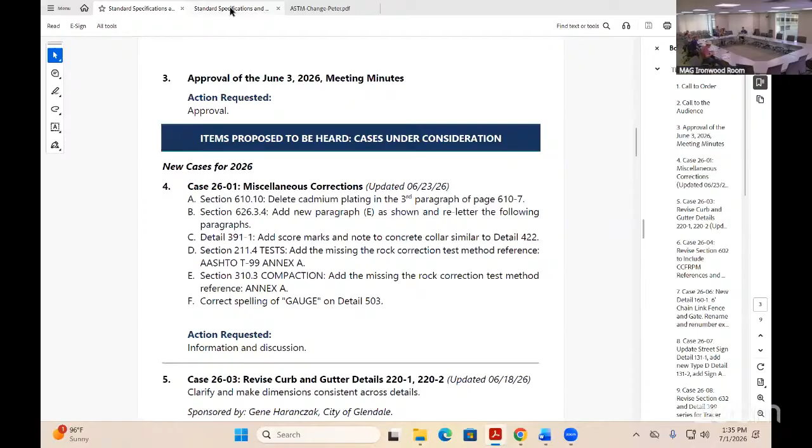Approval of the June 3rd meeting minutes. The meeting package was sent out last week. I'm hoping everybody had the opportunity to review the meeting minutes. As Gordon's walking through it, I'll open it up to see if anybody has any comment or correction that may not have made it into the meeting minutes.

If not, is there a motion to approve the meeting minutes? Mr. Chair, I motion to approve the meeting minutes as written. Thank you, Gene. This is Warren, I would second that. Thank you, Warren.

I guess with that, we'll go into the roll call. Thank you, Chair. We'll run down the list, starting with ADOT.

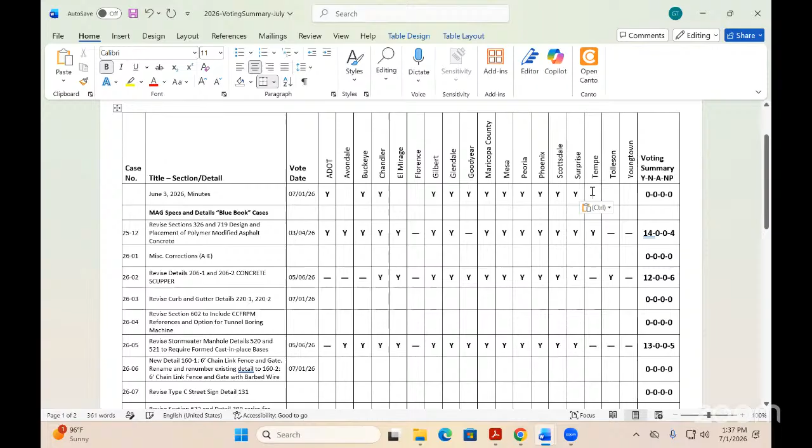Yes, this is Mike from ADOT. Avondale. Buckeye - good afternoon, this is Josh Ford, yes. Chandler, yes. El Mirage. Gilbert, yes. Glendale, yes. Goodyear, yes. Maricopa County, yes. Mesa, yes. Peoria, yes. Phoenix, yes. Scottsdale, yes. Surprise, yes. Tempe, yes. Tolleson. Youngtown.

Looks like the motion passes unanimously. Thanks everyone. We'll jump right into our case workload because it is quite extensive for this meeting.

Jumping right into case 2601, miscellaneous corrections. There have been three additions to the case. I'll go through the first one. Item D is a modification or correction to section 211.4.

It has to do with relations to testing and making sure that the rock correction test method is correctly referencing AASHTO T99 Annex A. That reference to Annex A was missing or is missing in the current specification.

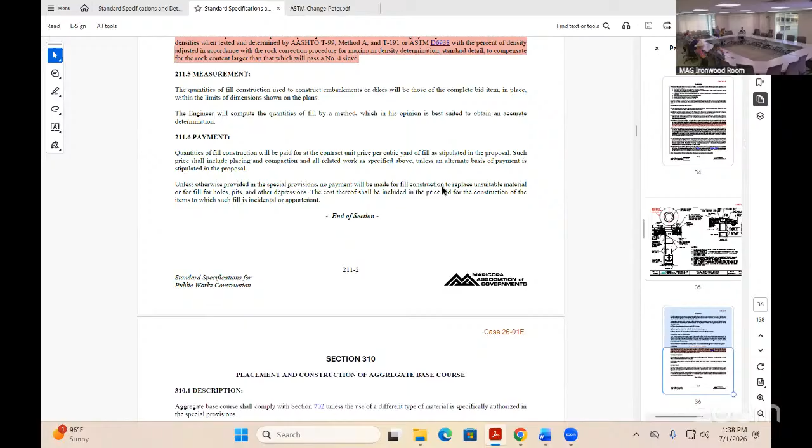Item E on this case is also the same thing, but that is under section 310.3. The rock correction also requires that reference to Annex A on the AASHTO T99 test method.

Finally, I believe Marty with Maricopa County pointed out a misspelling in standard detail 503, misspelling the gauge call out for the lid, as Gordon is showing. I don't know how long that's been around. Forever. And I'm pretty sure it's not the only one either.

Does anyone have any questions or comments on this miscellaneous corrections item?

Again, Gordon, if I'm not mistaken, the miscellaneous correction case stays open till we're done for the year? That's right, you can continue to add to it and it'll be voted on during the last meeting. So if there's another misspelling of gauge out there, feel free to point it out.

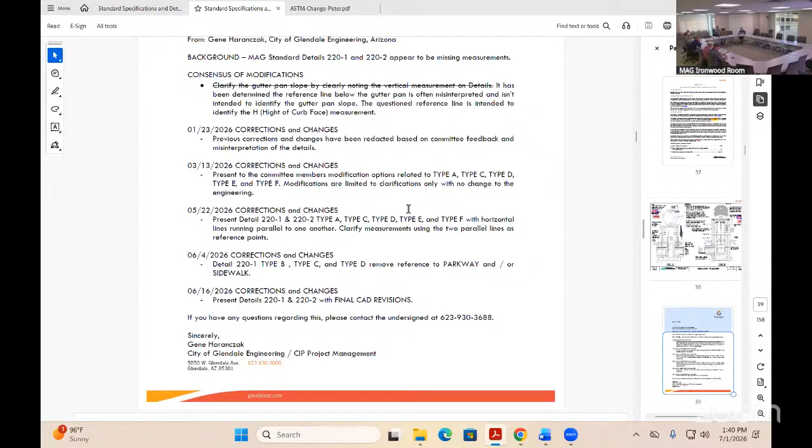All right, we'll move on to the next case, 2603, revisions to curb and gutter details 220. Gene? Thank you, Jose. There haven't been any changes to this since the last meeting, other than presenting this in CAD with a clean version.

One thing I did notice, and wanted to discuss - I haven't had a chance to connect with industry about it - after drafting the new CAD updates that we all kind of agreed upon, there's a cold joint reference for rolled curb and gutter type C and type D. I'm not sure if that was always there, but I'm not sure if it's going to cause a conflict with field construction when they place concrete monolithically with the sidewalk.

Like they do in a lot of housing developments, that might throw a wrench in the party for those guys out in the field, depending on the inspector they have. So I'd like to get some feedback from industry or from other committee members on whether we should keep that cold joint reference in there or not.

Do we have Brian Gallimore online? I believe so. Not sure if he can hear us.

Hey Brian, can you hear us at all? Oh, maybe you're not.

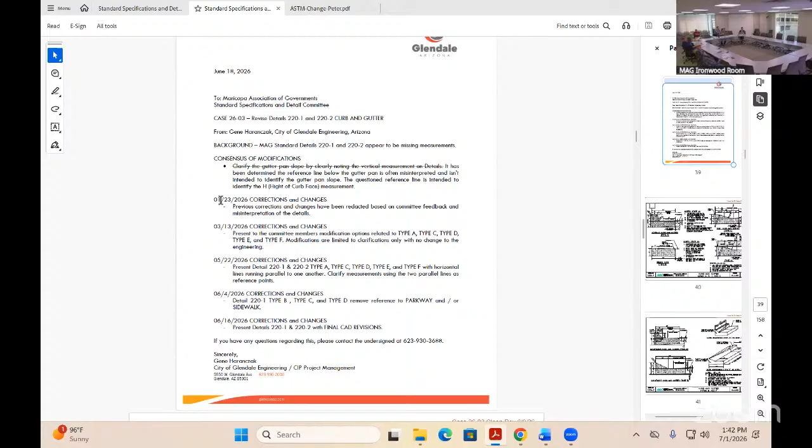So Gene, are you or the MAG committee changing any of the dimensions, or just changing the cold joint? There's a whole list, you can see all the changes on the cover sheet, but there are no dimensional or technical changes per se. Oh perfect, so the forms or nothing will change there.

Just to clarify, the way it was drawn before with the height specific to type A, the height for the face of curb was drawn on the far right of the schematic, and it was throwing a loop for designers thinking, what is that measurement? That horizontal plane reference line left a 1 inch gap that wasn't identified as 1 inch, so you lift the front of the curb up an inch, and naturally the gutter pan comes up an inch where it meets the asphalt vertically.

There was a lot of confusion with that. You can look through the changes made on each date, I have them on the cover sheet, but to answer your question directly, no technical measurements have changed. So we're not having to retool, same dimensions, same mold. After opening up type A, the whole committee realized we had the same problem across all the details, so we moved the back of curb measurement and cleaned up the visual aesthetics of it.

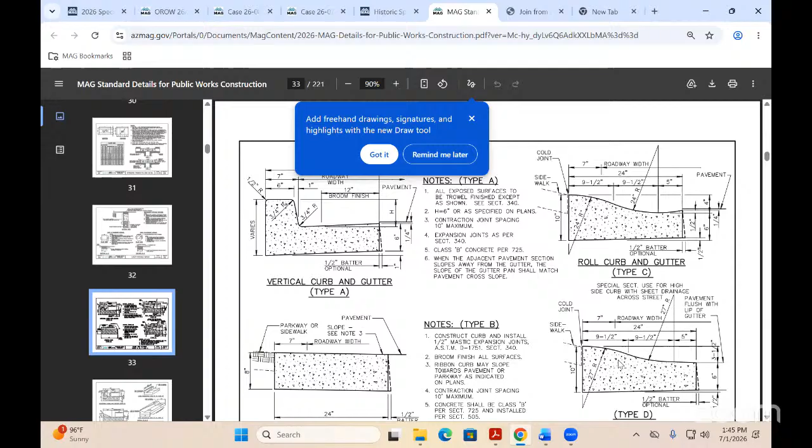That's not an ADA slope. Yeah, I don't think ADA applies there. Not only that, but we have a section for sidewalks, so a lot of times you have detached sidewalks. So really I think it's a moot point, I don't even think it needs to be in there in my opinion. If it was discussed, then yeah, I'm okay with it.

Does anybody else have any comments or questions on this case? I know we've been going back and forth quite a bit on this one. If no one has any other comments, I'll entertain a motion. Mr. Chair, being my case, I will motion to approve. Okay, thank you Eugene, is there a second? Mr. Chair, I'll second the motion. All right, thank you Ryan.

Okay, we'll go to a vote. Let's go ahead and run through again, starting with ADOT. Yes. So this is 2603, approval to revise the curb and gutter details 220-1 and 220-2 as presented.

Avondale, Yes. Buckeye, Yes. Chandler, Yes. El Mirage. Florence. Gilbert, Yes. Glendale, Yes. Goodyear, Yes. Maricopa County, Yes. Mesa, Yes. Peoria, Yes. Phoenix, Yes. Scottsdale, Yes. Surprise, Yes. Tempe, Yes. Youngtown.

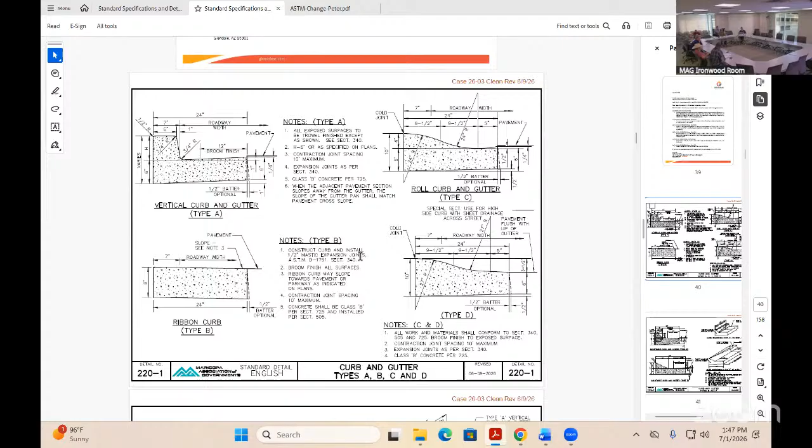Yeah. Arvid, I'll open it up to you if you can give us an update. Yes, sir. First of all, thank you, Gene. This is actually what someone who's been a part of this committee for a very long time in the industry really appreciates, is when the agency takes a lot of interest in it, because we want to get it to the place that, like Gene mentioned, it's not something you guys do day in, day out. And when you come across the need of it, you want to make sure you're fully comfortable with the way it's written and the way it reads. So Gene, great job. Really what has taken place is Gene has gone through it and just modernized it, specifically down in the area we were focusing on, which is down in the carrier pipe installation procedure.

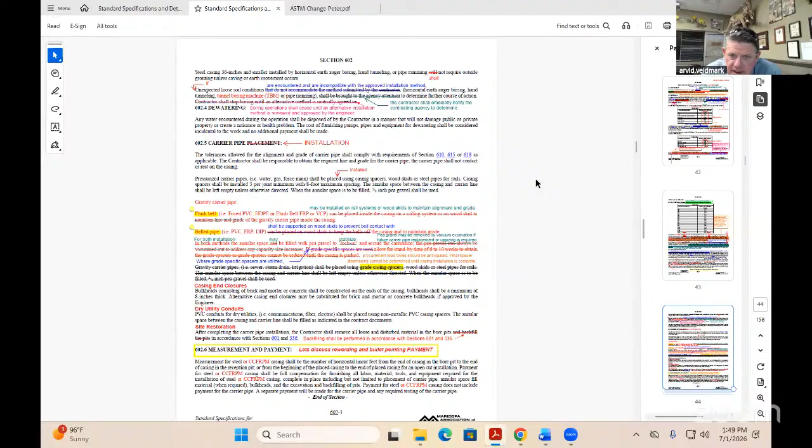He got really dialed in on the flush bell. What this was driven by at the beginning was needing to get agency and the industry on the same page with understanding that casing spacers are not a preferred installation method for gravity feed applications of sewer, particularly because of the reality that you can't order those spacers until the casing is parked. And with lead times ranging out as far as 12 weeks, you don't want to be having a bore pit open, unutilized for 3 months, waiting for spacers to show up.

And as we are moving more into sustainable sewer line products, such as are listed there, the PVCs, the HDPEs, and the FRPs, they all come in flush bell configurations, which allow for the carrier pipe to be installed through a casing on either a rail system or wood skids, and then fill the casing with pea gravel. If a belled product is used, you typically would then default to the wood skids method, or if you're so choosing to wait for the spacers, that's a choice that's also there. And Gene did a good job of explaining and just at least stating the reality that there is a time constraint there.

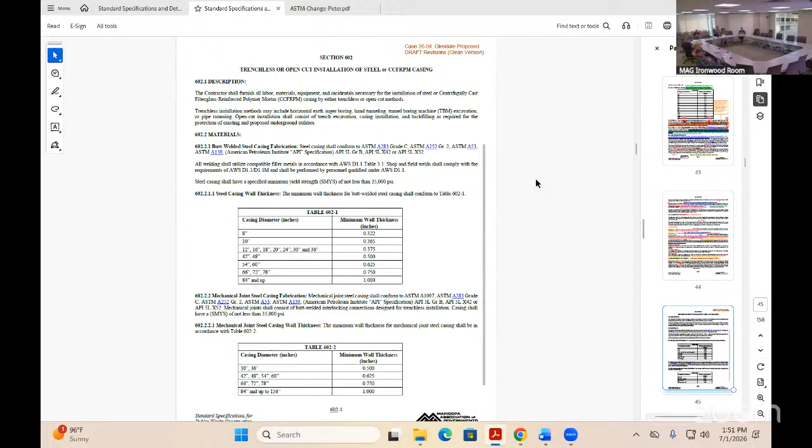It might be good to go to the clean version and let it be read and seen on the screen there, Gordon. And then Gene, do you want to take the helm and add anything in addition to what I've said? Yeah, thank you, Arvid. I had basically wanted to get with the committee, Mr. Chair, on the 602.6 measurement and payment.

I moved in on the clean version. I kind of moved in with bullet points, and I just want to be able to follow the publication's layout. So really that's what I'm going to ask the committee to look at the whole case, but also pay attention to the way it's structured and laid out, and make sure that it's consistent across the board with the rest of the publication. I had a hard time reading that 602.6 because it was so jumbled up that by the time I got done with one sentence, focusing on the next sentence, I forgot what I was supposed to check on the first one. So I just put it in bullet points, that way you can go through the list of payment items.

You're talking about 602.6, Gene, right? 0.6, I'm sorry. Yeah, 602. Okay. And just to clarify your intent, Gene, you didn't make any intentional changes, you just reworded it. I did. I just reworded it, and I had Arvid proof it twice. I think the second proof, Arvid, did you get through the whole clean document?

I did, and I have 3 things that I think we can either talk about this month while the committee reviews it, because it's obviously going to need to take a little bit of time to be looked at, or we can, I don't know if we want to take time to do it now. I think it might be better for you and I to talk first, and then we can present it to the working group or just to the committee next week or next month. Yeah, in the sake of time, I think that's probably the best. Okay. Something like quick reference, but if it's in-depth discussion, it's probably best handled at the working group.

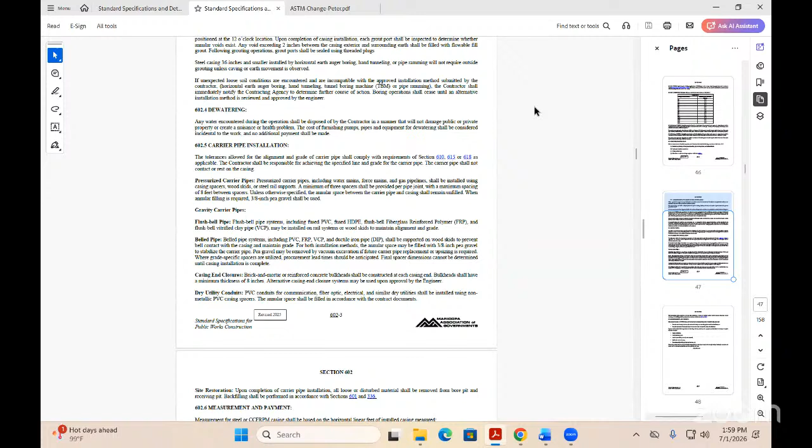Sure, yeah, I think Gene, you and I need to talk about that a little bit then, and maybe even include Mike on that, because again that is really a big aspect that as we expand this, we need to have more discussion on it. Okay, yep, I made a note of it. All right, thank you Arvid. Thank you, Mike.

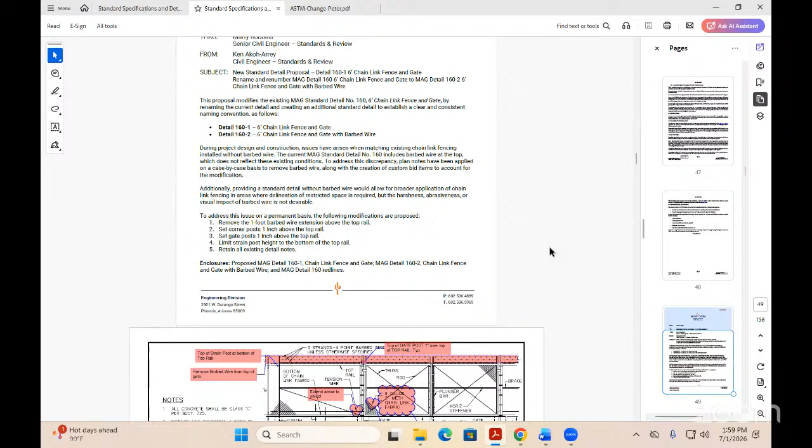Marty, can you give us an update on this case? This is Marty from MCDOT, Maricopa County. I don't have an update for this case. I know people are going to have an opportunity to take a look at it, see if they have any questions, so if there's any questions, if I can answer or not.

Okay, thanks Marty. I see that the last update for this case was back in May. I think we've all had a good opportunity - this is a minor change, I think it's been discussed. Does anybody have any comment or remaining question on it?

Mr. Chair, we did discuss it quite a bit at the last meeting. In my opinion, it's ready to go.

So with that, is there a motion to approve? Yeah, Mr. Chairman, this is Marty Robbins from MCDOT, I'd like to make a motion to approve this case as shown. Thank you, Marty. Is there a second? Mr. Chair, I'll second that motion. All right, thank you, Gene.

Okay, we'll go ahead and take a vote. This is case 26-06, which is creating a detail for the chain link fence without the barbed wire and renumbering the existing one.

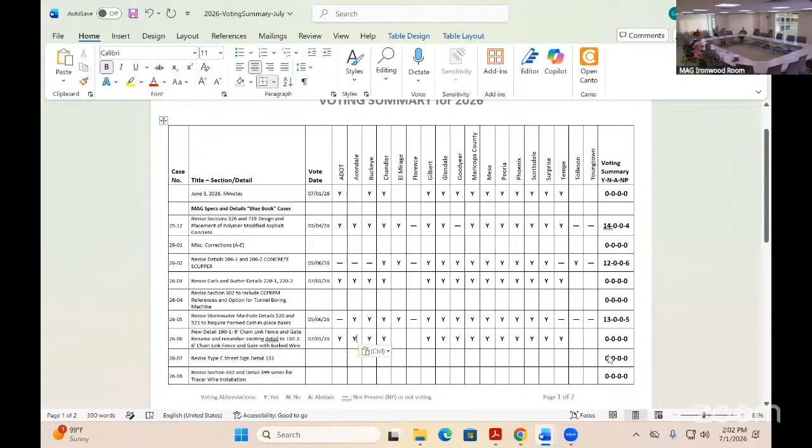All right, thank you, chugging right along. Our next case is 26-07, updating street signing detail 131, 131-2, and 131-3.

Warren, can you give us a brief update on this? Thank you, Mr. Chair. I have not made any updates since the May packet. I know we did talk about it in the working group, and I've received some feedback from Gene on the U channel and from Jose on the round post that we can talk about.

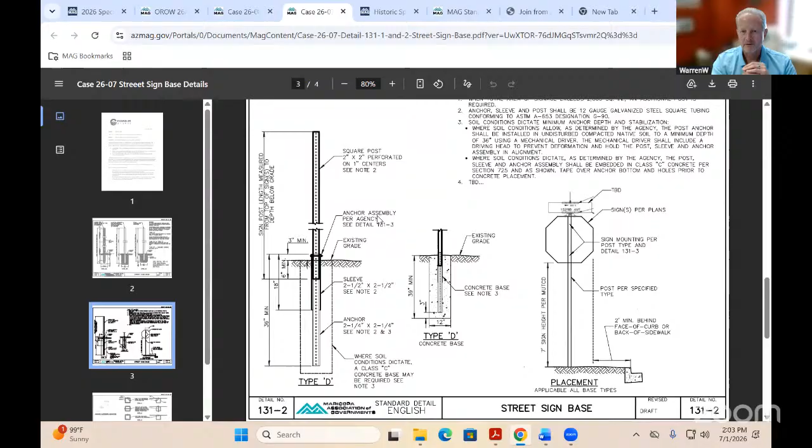But it seemed that I wanted to talk a little more with this committee. One pathway would be that we just decided to only have the square post - obviously the predominant standard in all of our agency details - and then potentially remove the U channel and the round post and possibly put that outside the right of way. I'm okay with either way.

I've spoken with our sign shop, but their feedback has always been they predominantly use the square, but there are instances where they still use the others, and we still have those other types of posts out there. When they do replacements or a new CIP project, they do swap them out in favor of the square post, but so yeah, before I did anything on that, I thought I'd just regroup with you all and get some feedback on where I should go with this.

As it stands now, we can leave everything in as is, if others are using these other types of posts. I've even seen the U channel used with some almost breakaway looking base. I was up on one of the mountain roads outside of Payson and noticed that, but I haven't explored it beyond that. It just seems, based on what everyone's using, that the MUTCD is geared towards that square post as the breakaway standard.

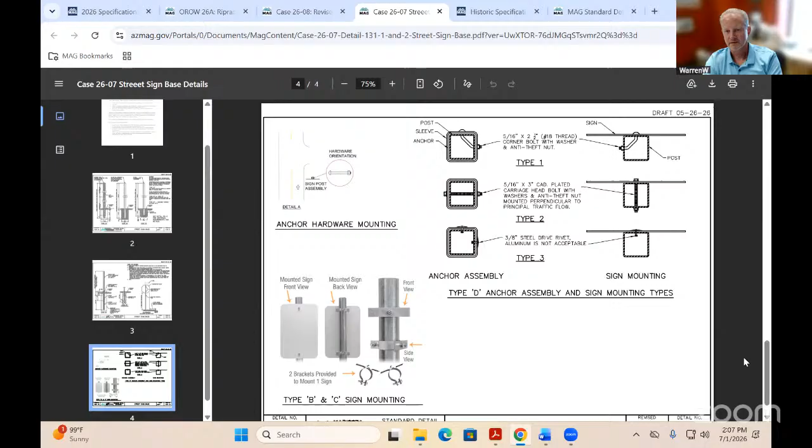I guess that's part of the challenge when we're trying to make an all-inclusive detail. No, and that's the ultimate goal, to allow the ability to reduce supplements. Then that would make sense as this first step to get everything on here, and we can always take it off later if that becomes the one standard. I would be in support of that.

Does anybody else have any conversations with their signing staff or any thoughts on top of their head? I do like your note, Mr. Chair, about agency's approval. Yeah, that's a good catch-all for when we have multiple options.

Mr. Chairman, do you want to possibly say agency approval when used in right of way? It seems like that's the problem - that it contradicts other standards if used in right of way. Or am I not hearing this right?

No, I think it's just the concern that Gene is kind of leading up to is MUTCD may have certain requirements as far as base height, making sure a vehicle can go over it, have a breakaway requirement. And we want to be careful, Mr. Chair, of overstepping those boundaries with the MUTCD.

Correct, but that's primarily in right of way - this standard is for right of way. I guess the way I'm interpreting it, this is a right of way detail, right? Whether it ends up applying to private property - well, I'm thinking parks, agency owned facilities that are not in the right of way. Does it? I think most of these would apply for that situation. Yes, I've never seen breakaway in parking lots.

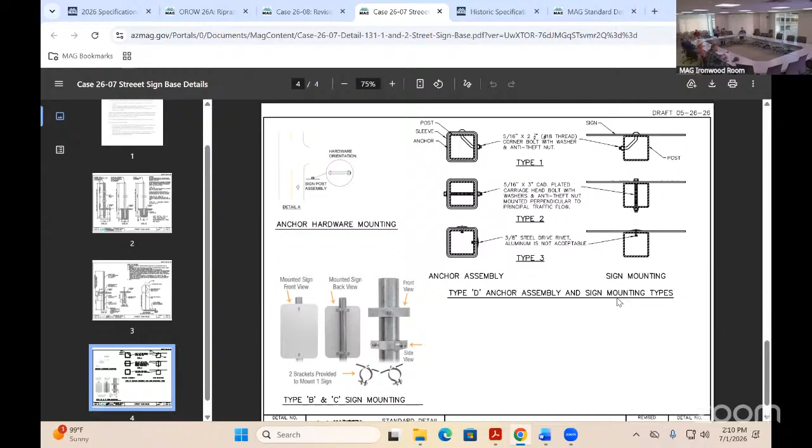Jim, I saw you turn your camera on, were you going to comment? Mr. Chairman, could you go back to the detail D, or the type D? In Avondale we use that, and I liked what we're doing there because preferably we don't like to use concrete since it hinders replacement—you end up digging out the big base, and contractors put it in when they shouldn't. We talked about that, where soil conditions dictate Class C may be required, see note 3. I like what we're doing there, but again, the agency should make that determination. Some soils don't need the concrete, but if you're in sandy soil, you're probably going to need a concrete base for that type D.

Right, Jim. But in most cases we have really good luck with no concrete—it's easy for our crews to replace, because if there's old concrete base in there, you have to dig it out. It really hinders and takes forever to replace the sign; this way you just punch it and go. So I like that we have that option in there. That's what I've heard as well—the preference is obviously just to punch it and go, but there may be those few instances where it doesn't work and concrete is the option. So, all right, thank you.

Is there anybody else that has a comment or question for Warren on this case? As the case goes, in the next couple weeks, Warren, we can touch base on some of the comments and see what I hear back from our planning staff as well. I encourage everyone to please talk to their sign shops and see if there's any strong feeling one way or the other, whether we should potentially move them outside of the right of way or keep them at this as a first step. Please share that feedback. All right, thank you.

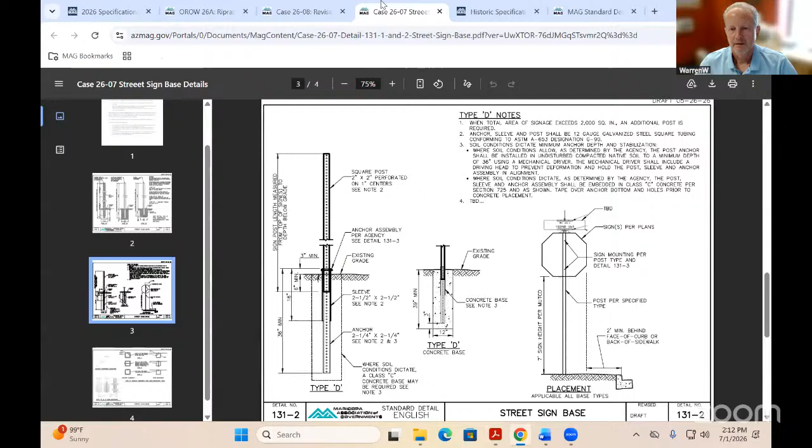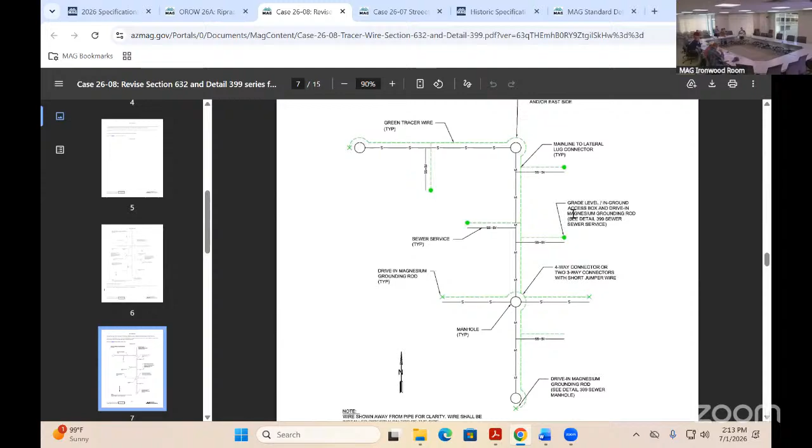Unfortunately, not a lot to report. We still have not had a chance to get the details drafted up, so the last update is on the spec. We very briefly looked at it in water and sewer, but it felt better to wait until we had a little more to talk about since there are other more pertinent items on water and sewer to look at. So don't have any feedback or comments to share today, but really would like to get those details for the August meeting—that's where we're at. Thanks for the update, Warren, we look forward to the updated details. If any agency has also implemented this or started to implement this—I think Warren asked last time—any lessons learned would be perfect timing to share right now. Thank you.

Case 2609, revised section 631, water tap and meter connections for PEX A pipe. Looks like last month there was an update, Warren.

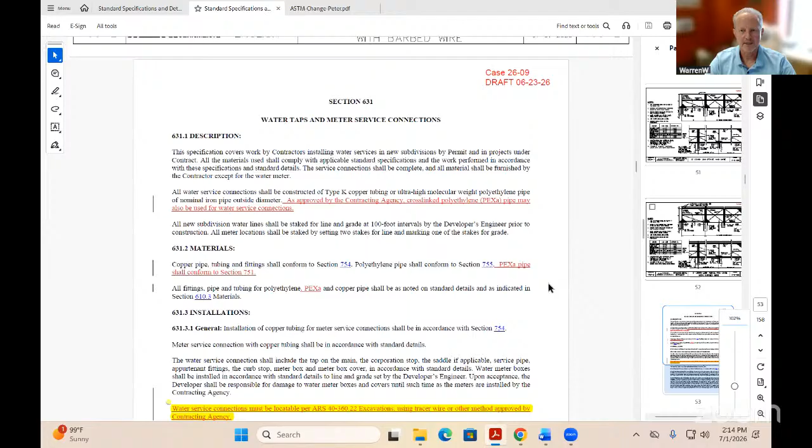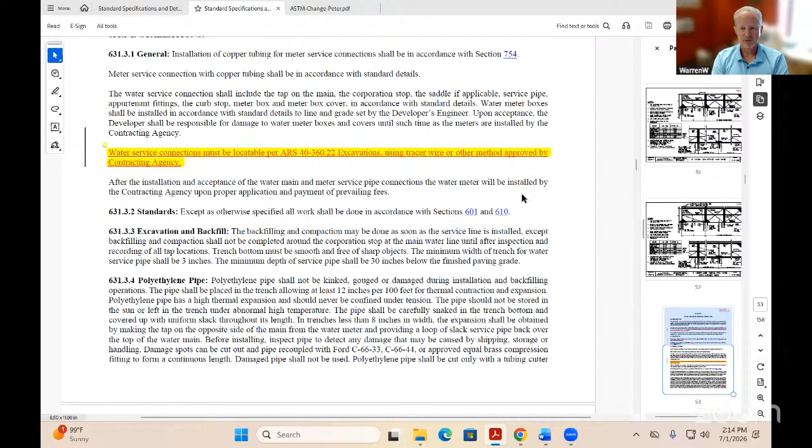Correct, I did do an update based on some discussion at water and sewer and a typo that I had. So what's shown here highlighted is new from the previous draft version, adding in the requirement to draw attention for service line connections that—if you scroll down a little bit, Gordon—the water service connections must be locatable. They're not saying it has to be tracer wire, but it has to be approved by the contracting agency. We haven't had a chance to talk about that at water and sewer since it's new, but that's the latest draft. Down below I'm just fixing some typos in the section numbers. I haven't received any comments yet on this, but this is where it's at.

Anyone have a comment or question on this particular case? Did you want to take a look at the wording I added for the tracer wire—I'm sorry, for the locatable language? Scroll up a little bit, sorry. Maybe just read that language real quick and see what everyone thinks about it. Yeah, right there, yeah.

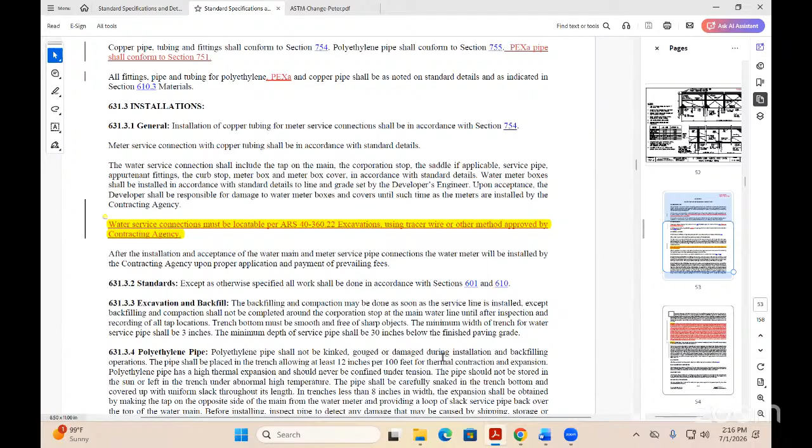How does that sound? Yeah, it looks okay to me. I don't have any comments on the language. Anybody else have a comment?

No? I noticed I use the word 'must' sometimes where in a lot of cases we're saying 'shall' in the MAG. Do you think we should be consistent between the must and the shalls, or is that okay?

How much time do you have? We must, may, versus... Our attorney, I don't know if I've shared with everyone, but we went through all of our manuals and changed every 'shall' to 'must'. So therefore I've been reprogrammed. Must is acceptable. Hopefully you don't change attorneys in the near future and change something else.

Yeah, no, I think it's in line with the rest of the manual, right? I don't know that the manual itself is consistent on the use of must or shall, although I think I tend to see more shall than anything else, but yeah.

All right, Mr. Chair, I don't have any objections as written. One way or the other, I'm good either way. It's just a reminder it is state law, right? So yeah, it's all right. Thank you, Warren.

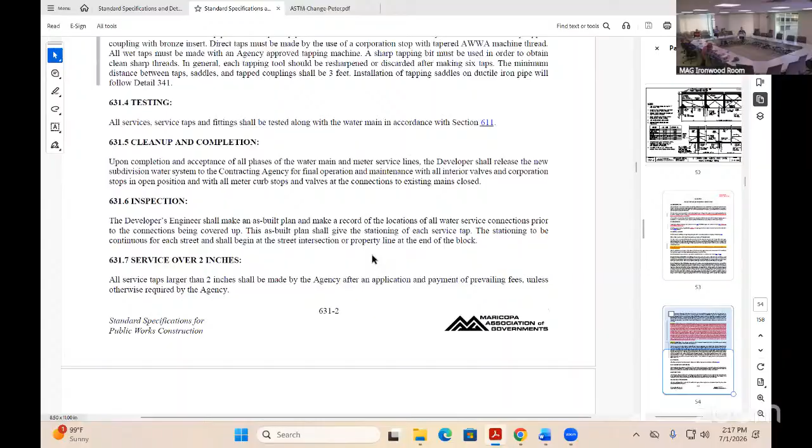All right, case 26-10, revised section 757, for references to filter fabric. Peter, can you give us an update? Yes, thank you, Mr. Chairman. Instead of putting this as a miscellaneous case as was discussed in the last meeting, this was put in as a case because it was a change from the type of material that was being specified.

The reason it had to be revised was initially because the ASTM requirements shown in the standard weren't correct. We initially were going to just call out similar ones, but after discussion with the landscape architect folks, they felt that table 796-2 was the more appropriate one for just a separation fabric. So trying to get rid of a lot of stuff that was maybe or maybe not applicable, we simplified it down to saying valve box material shall be a filtration fabric and referencing now 796 in the table. So it's really a simplification.

And just remind me, Peter, 796 is just your regular... separation? 796 is our geotextile specification, not erosion. We have somebody who is reviewing the entire spec, and next year we'll be proposing changes to that. Okay, but in the meantime, that section still is applicable.

And after review by two landscape architects involved with it, they thought that material was fine. No, and I like and appreciate the fact that you're writing it in a way that if we have to update 796, then this is taken care of. So yeah, that's the idea, is always try to make it so you only make one change once, and not have duplications.

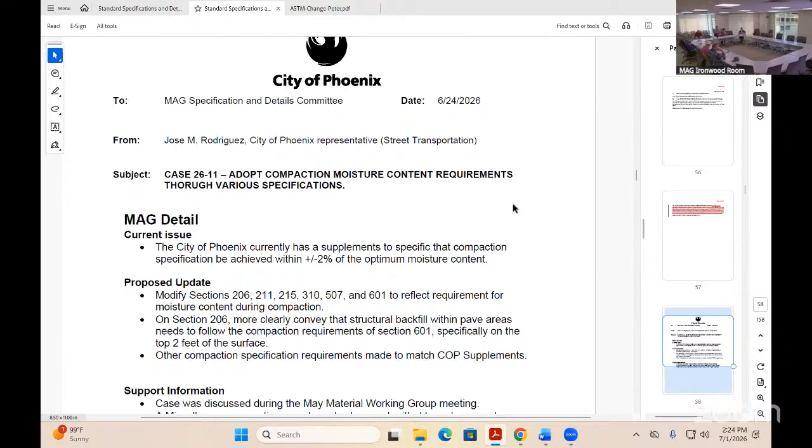I'm presenting this case. The background is that currently in the city of Phoenix, we have a supplement where all the compaction specifications have to be achieved within plus or minus 2% of optimum moisture content. This is something the city of Phoenix has adopted over multiple years. I really don't know exactly how far this goes, but it goes quite a bit from what people have told me.

In an effort to simplify our supplements, we wanted to bring this up to the main MAG to see if we can also incorporate this requirement into it.

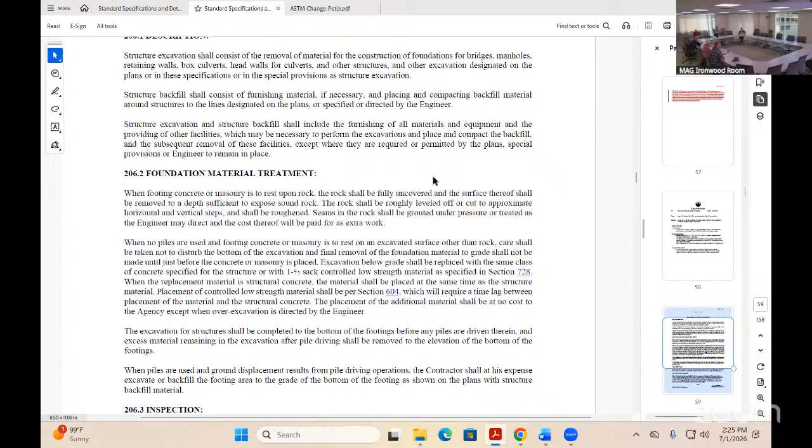What I did is I went through the different specifications where it calls out a minimum compaction effort and added the language that compaction be achieved within plus or minus 2% of the optimum moisture content. There were a couple specifications that already had a reference to the requirement of moisture - we just made everything consistent to be 2%.

I think there was one other case that was recently adopted that allowed plus or minus 3%, but this way it's consistent across the board.

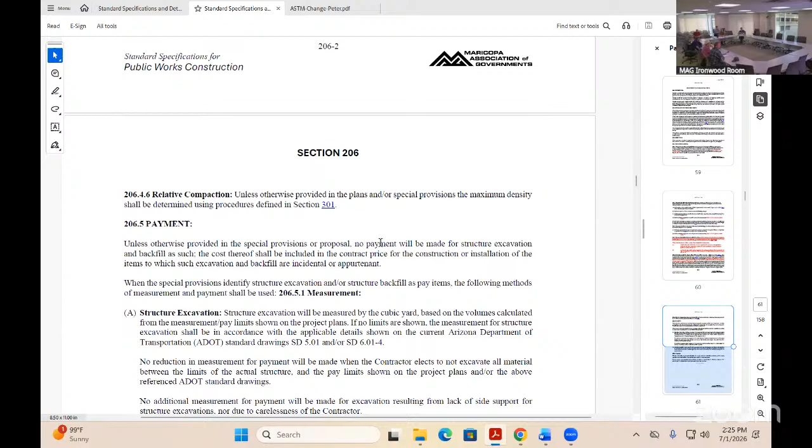Mr. Chair, this is plus or minus 2% of a laboratory compacted specimen, right? Correct, this is plus or minus 2% of the Proctor optimum moisture content.

Which is that a 698 Proctor, I would assume? Yeah, whatever is the test method specified on the compaction effort, but I believe yes.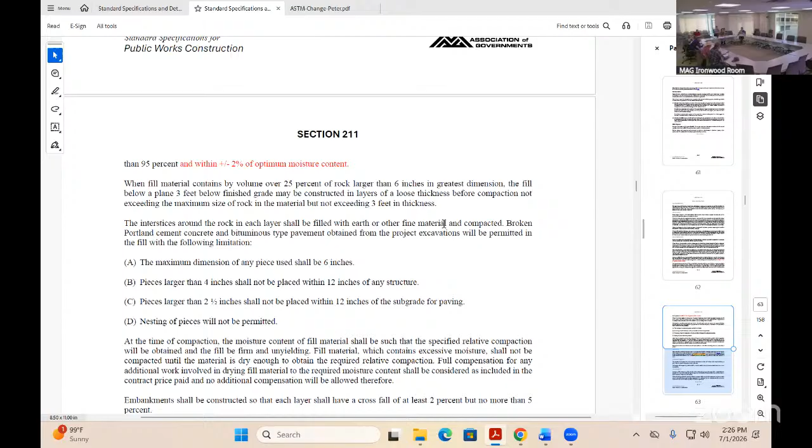The only reason why I ask is because Glendale for the longest time, since the beginning of time, was plus 2 minus 4, but it was a 1557, which is twice as heavy of a hammer and 5 lifts versus 3. So there's a lot more effort going into it, but with the 698, I think plus or minus 2% would be appropriate.

Yes, I'd be lying to you if I recall every single test method called out. I think consistently, pretty much most of the specifications call that.

ASTM D698 - oh there it is, right there under 211.4 tests. Oh wait, no, that's ASTM 6938. So that's the field testing, not the laboratory compacted specimen.

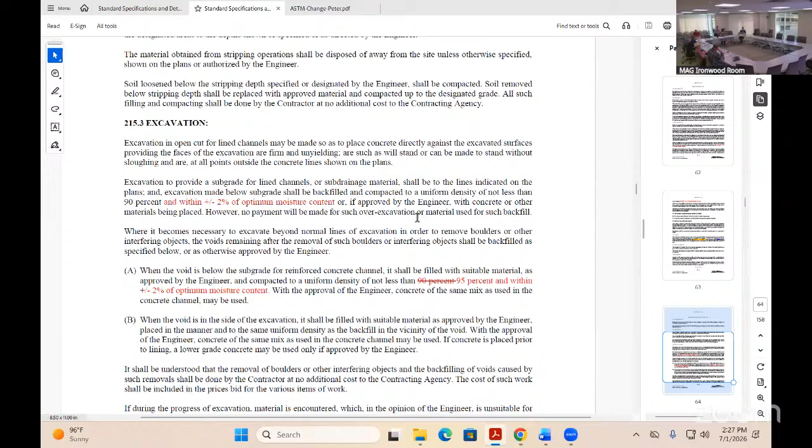Yeah, this is field compaction requirement. When you take a test in the field, you're comparing it to a laboratory compacted specimen. Are you saying the percent compaction needs to be plus or minus 2% of the laboratory? No, the compaction requirement stays the same. So if it requires 95% of the Proctor...

The only thing this is adding is that the compaction effort we achieve while the material is within optimum moisture content, plus or minus 2% of the moisture content for the Proctor, for the laboratory compacted specimen. Which we haven't determined - we assume it's a 698, right?

Some of these don't define which test method. Well, that's what I'm having trouble finding. So when you're asking, I'm trying to find out exactly - I'm in support of plus or minus 2%, unless it's a heavier Proctor, like a 1557, where you have a lot more effort going into it. Well, even then, it may still be - it's not changing the value of the Proctor you're getting, right?

It's just making sure that, because technically you can achieve compaction with little moisture content, you just need more compactive effort. You're still going to hit your 90, 95, whatever it is. This is just saying that compaction effort needs to be achieved while the material is close to optimum moisture, within plus or minus 2% of optimum.

It's interesting these sections don't define which method until - well, there's a section that says test method. Is that just to help contractors achieve compaction, or is there some performance related concern with being over or under and getting compaction?

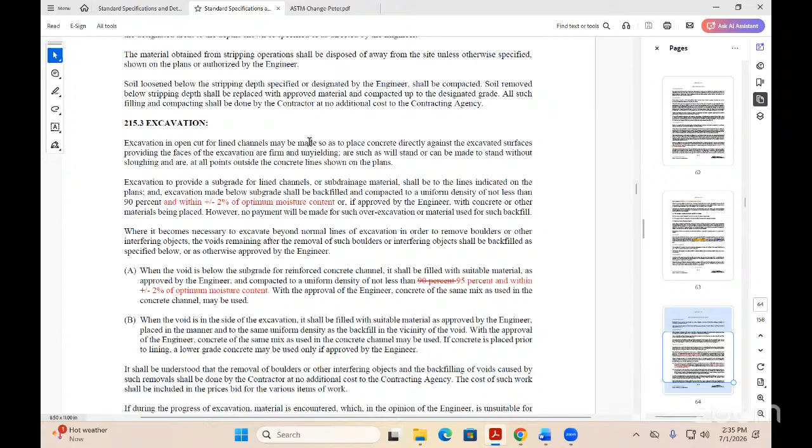Okay, as of January 31st, 2026, everything is moving up to that new supplement. So, okay, it gets really hard to keep track, even for me.

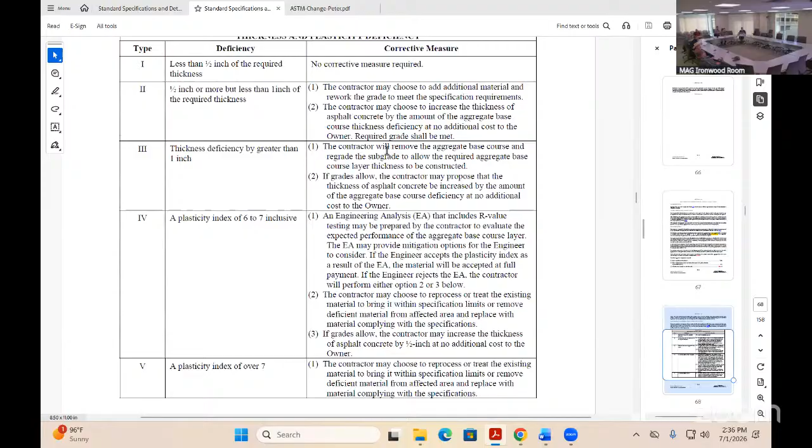Alright, and this is the first time we're sharing the case, so obviously a lot of it is new. But does anybody have any comments or concerns with the approach, or at least the idea of adding this into the specifications?

And you've also got the rock corrections in here too, referencing Annex A. Yeah, I think that's a slam dunk. We were using the same Word file for the miscellaneous corrections, and okay, you've got that in here too.

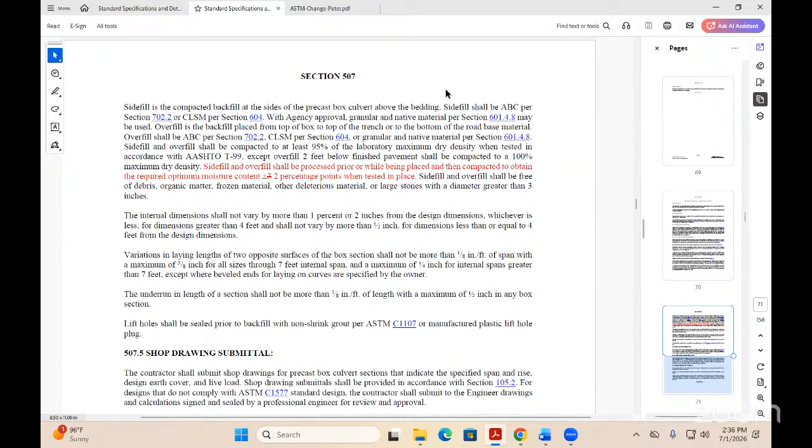So from a contractor's view, I think it's fine for section 310. I just think touching the other sections could be a problem. Which sections do you have concerns on, George? Well, I mean, you have section 211, and then you get into, I believe, some of 600.

Those specs, those percentages of compaction have been in there forever. No, so the intent is we're not changing the compaction effort we're required to meet. We're just making sure there's moisture in the material as you're compacting it.

I'll say 600 is the meat and potatoes because that's the trench backfill requirements, probably where it's going to be more applicable. So someone, you're more just, you want the plus or minus 2% of optimum moisture, correct.

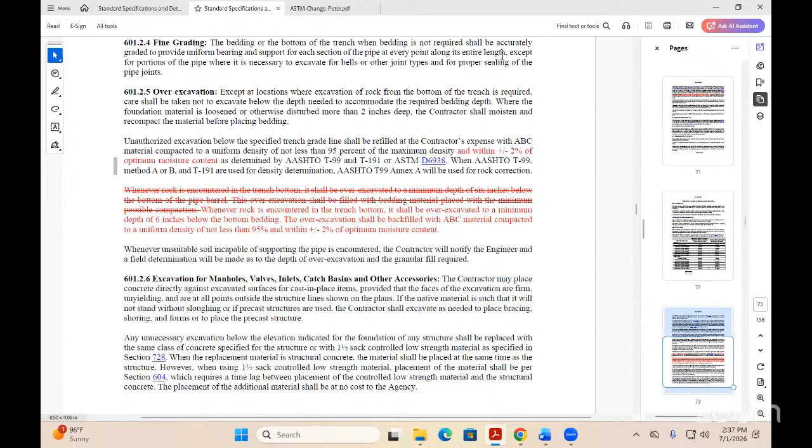And then to George's point, section 340, you start getting into some expansive material and you've got optimum of 0 to +3. But I don't think you're touching that spec. I'll go back and make sure we're not touching that, because this is not really intended to address expansive soils.

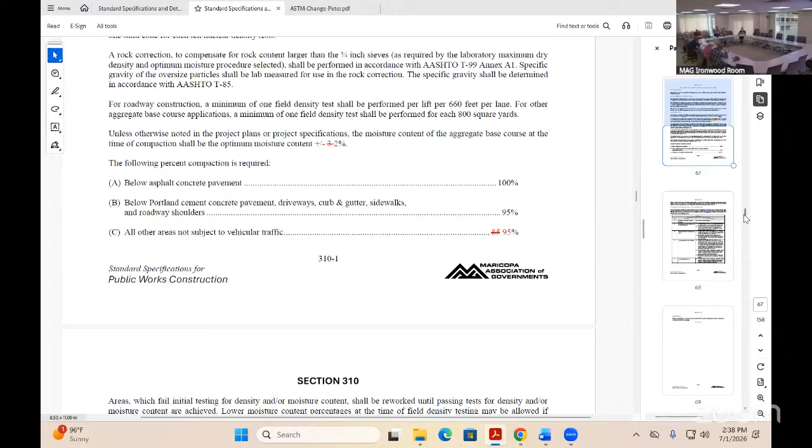And some of the other specifications related to roadway excavation and drainage excavations for channels, the compaction requirements only come into place when you're over excavating for, like, when you find rock or unsuitable material. So it's unlikely to apply on those cases. But no, thank you for the input, George.

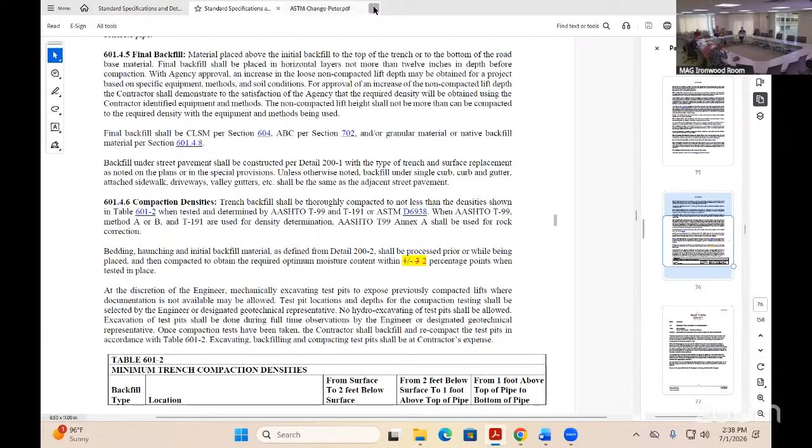We'll go ahead and go into case 26-12, revised detail 203, scupper to extend, scupper with option of safety rail. Marty, can you kind of give us a background on the case?

Yes, thank you Mr. Chairman, this is Marty McDodd. We'd like to propose updating 203 to include an optional extension of the scupper and a safety rail.

A few years back we updated our roadway design manual based off the guidelines for the planning, design, and operation of pedestrian facilities. And although it's a recommendation based on protection from drop off for sidewalk, we actually updated our RDM to reflect that section.

Part of it includes the section to say that a scupper that behaves as a sidewalk, we had to include a safety rail on the back of that, which is not in it currently. So since then, we've been retrofitting our construction crews, putting safety rails on the back. So we would like to do an optional extension of the scupper and optional safety rail on the backside.

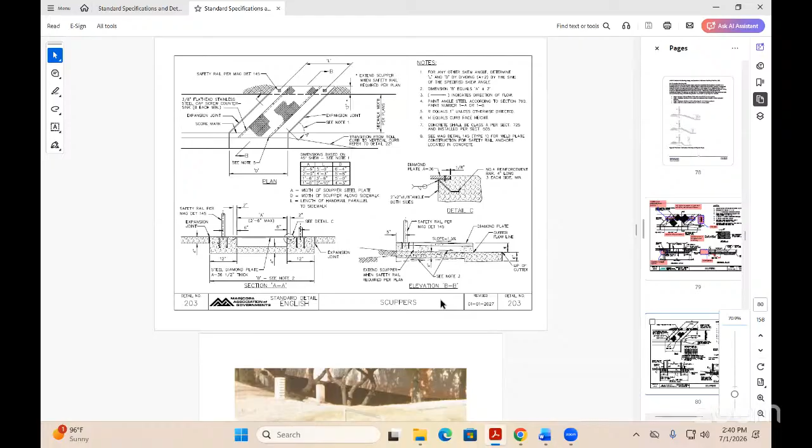So basically what it's calling for, you see there, and then safety rail in the back, the length and the dimensions based on L and D.

And it should be noted there are a couple updates. We received updates from our construction team and our structures group, so that is not reflected in this update at this point.

So on note 1, we're going to be updating that note because I didn't like that anyway, since I don't want contractors doing any calcs to fill. For that note, the link D that's shown there, that's the perpendicular distance or the distance between the joints, based off the angle.

In this case, that table is based off 45 degree skew for L and D, for the length of the safety rail on the backside and the D. And that note 1 says for any other angle, the skew angle should be determined by... we're updating that, so that's not what we want. That's not what I wanted to begin with.

So that's going to be per plan. What we want to do is say for any other skew angle than 45 degrees, use L and D per plan, so there's no calculations there.

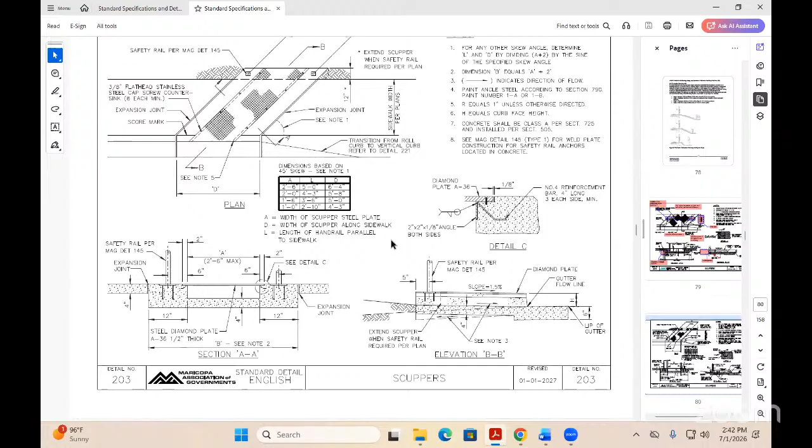I don't know if anybody had a chance to review this, of course, because it's new. So that's what we do right now, that's what we do on the backside. Still don't like it because it's in the ground on the backside. So this is safety for walking and whatnot, but not for any other purpose.

And sorry, Marian, I didn't mean to cut you off. No, that's fine. So like I said, we received comments since I updated, gave this to Gordon, which I'm going to be making and submitting next month. I don't know if anybody has any questions on this now.

I know when I initially presented it back in February, while it was unofficial, I didn't say optional in that case, but we do want to make it an option per agency for the plan, because I know we talked about the ADA last week.

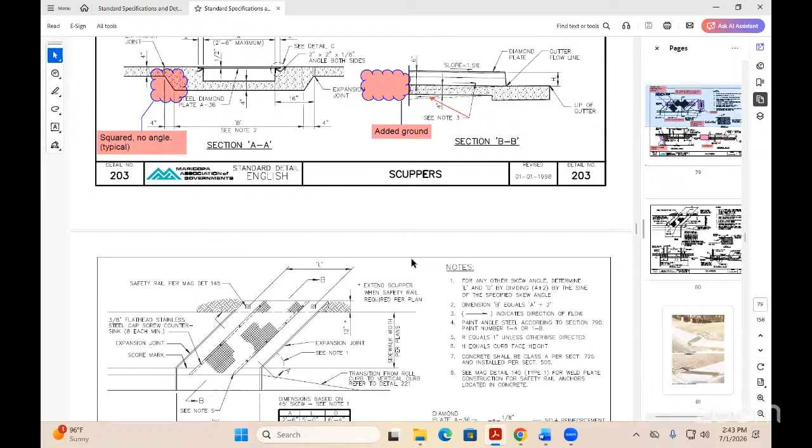I think it was about liability when it's not required. So it's not required, we couldn't find anything that says we're required to put a safety rail on the backside, except that the guide recommends one if it's greater than a 1-foot drop off with a 1-to-1 slope within 2 feet of the backside. So if it's within 2 feet of the sidewalk and it's a 1-to-1 slope or greater, or deeper, a 1-foot drop off, that is recommended to have that stuff.

So we went ahead in our RDM, which states that we require one when the scupper behaves, or functions, as a sidewalk. Needless to say.

Okay, so if I interpret this correctly, Marty, when you're saying optional, is the safety rail on the top of the page not technically required? Does the note apply only when required by the safety plans, or by the agency, per plan? So like MCDOT requires that on all of our scuppers, that we include this and include the safety rail on the plan. But if it's not, then the extended scupper and the safety rail is not required, so that piece and sections are not included.

And I guess one of the things that's throwing me off, okay, is it an extension of the scupper, right? This is just installing a safety rail on that scupper. Say that one more time.

Oh, I guess when you say extend, right, so I imagine is it only in the cases where there's a rail there to begin with, or is it? No, I got you, I understand what you mean. So yeah, you're right, so I need to take a look at that, because it's not really an extension, so when you place it you're just adding that section. So you're right, I think 'extending' isn't the right word.

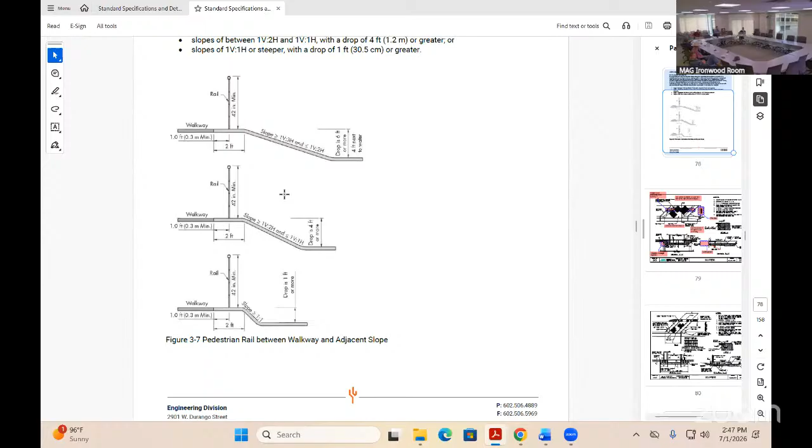Mr. Chairman, just on that specific point Warren's talking about, we brought that up in the outside right of way too. And the question comes down to, should we be looking at something like this as an outside right of way standard, not where scuppers are at, but where there's a slope adjacent to, actually outside the right of way typically. And I think at this point we've kind of set that aside, let's discuss more.

And Peter, there's also building code requirements that get into drop-offs too, that might even be more applicable to that. I can send you that information. And as we were researching, Marty, and we were having some email conversation, we found the building code requirements too.

Yeah, I think after our ADA meeting, and we talked about the table that you showed us, Warren, we actually looked at the IBC code, and I think that 30 inches is specified in the IBC code. So I think the AI might have hallucinated on that, that's where that came from, I think.

Yeah, I think I ended up double checking that one, Marty, but I'll look back because I know there was a bunch of hallucinations in our AI research on that. We had, yeah, there is a city of Phoenix standard, that has 5 feet, and that comes from an old ADOT standard.

So there's multiple standards, and I think that's why we tabled it, we need more research and see where we want this to go. The 2 foot, I think, is gonna be a bit more comfortable considering what's out there.

Yeah, you know, it's a great point, Marty, because I think you've discussed this in the past, looking at a lot of the different guidance documents and standards that you shared also, Peter. A lot of them do reference, I haven't seen one that says less than a foot that would trigger a requirement, but our current other type of scupper detail, I don't believe that's a foot drop off.

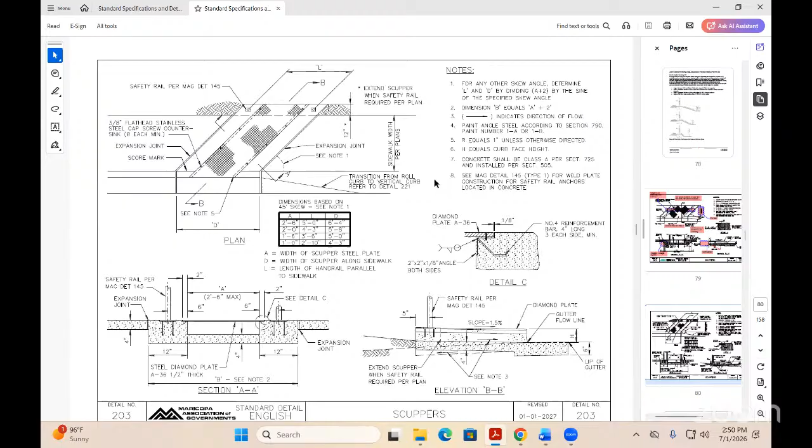This is Roy, City of Scottsdale. I appreciate Marty sharing all the information and actually educating me on that AASHTO guide for planning and design that he's referencing here in this case. And like Warren, I read it the same way, that if the hazard, and in this case the drop off, is more than or less than 2 feet, that would be when the recommendation would be made to put in the rail.

So what I'm wondering is, in this detail here, if we're already looking at extending out the wing or putting a wing on it, and we're calling out the wing as 1 foot wide, do we just want to put the 2 foot wing on it? Then that rail does become potentially optional, where you've got a 2 foot extension now. So the edge of your scupper is 2 feet off of the edge of your sidewalk, as opposed to the 1 foot that I think is being proposed right now. And I think that's the same as our 206 detail for our scuppers, also got a 1 foot. I just didn't know if it would make sense, instead of doing the 1 foot extension, to make it 2 feet as the standard, and then you could call out the rail as optional.

Well, right now is the extension only added if there is a rail? That was the idea, that was the thought. Yeah, because you would only need the extension to keep your sidewalk width, right? If you don't run rail, you don't need to extend the scupper.

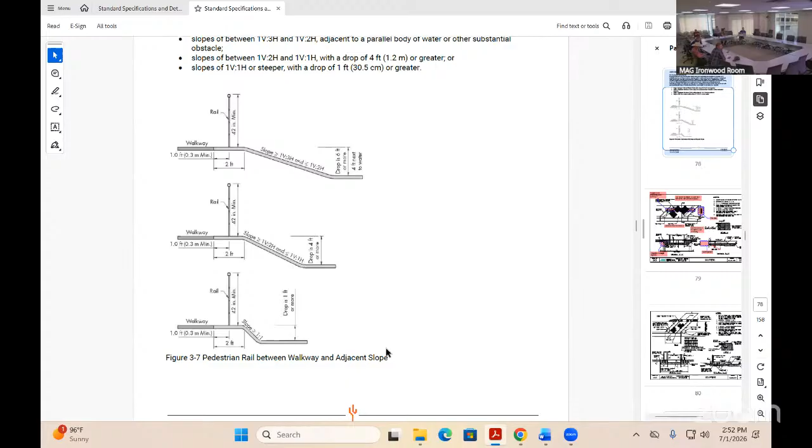I guess I was just reading the AASHTO guide as, then you would have any drop, and I guess this would probably apply more to the 206 versus the 203 that we're talking about here. But if you have any drop within the 2 feet, obviously if it's greater than 1 foot, would require the rail. Yeah, that's how I was interpreting it too, Roy.

And so then that would apply all the time on our 206 scupper, because we've got the concrete lid on it, which is 5 inch thick, plus the slopes of the sidewalk and the slope of the scupper drainage itself. You always have a height greater than a foot on our 206 detail. That's where I was just thinking that maybe the extension being a 2 foot versus a 1 foot.

And I was carrying that over to this as well, but maybe it wouldn't apply for the 203. Yeah, and the 206 you've got up there, where we've got a 1 foot wing or a 12 inch wing. But with the way the scupper is built, you're always going to have a drop off that's greater than a foot if it's built per the standard detail. The 6 inches plus the 5 inches of your slab on the top is going to be 11.

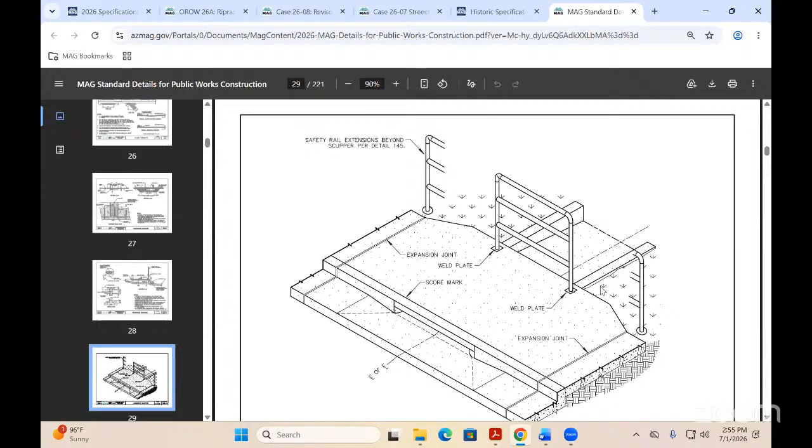That's true. So just some thoughts I had. The extended 2 feet, you want them to avoid handlebars. Generally speaking, bicycles belong in a bike lane or a multi-use path. That would be our position on that. If it was a multi-use path that included bicycle traffic, then I would agree with you. But this is a sidewalk for pedestrian use, a crossing for pedestrian use.

Certainly, but you've got bicycles that are allowed on the sidewalk. So in areas where you don't have bike lanes or bike routes, that's where it would be used as a multi-use path. That is correct. But I know here in Scottsdale, we've got it on just typical sidewalks. You've got people that are riding bikes on sidewalks.

This sounds like this could be a case all by itself, so maybe this is something we get together on and talk about, because I'm still concerned about slopes dropping off, slope within 2 foot. You've got a steep slope, we're allowing those without even a talk. Glendale's not allowing those. We have standards on, well, 10-to-1 or whatever it is. That's what I think we need to look at, maybe as was done on the other one. Let's look at all the different standards, see if we can get a uniform approach for both drop-offs.

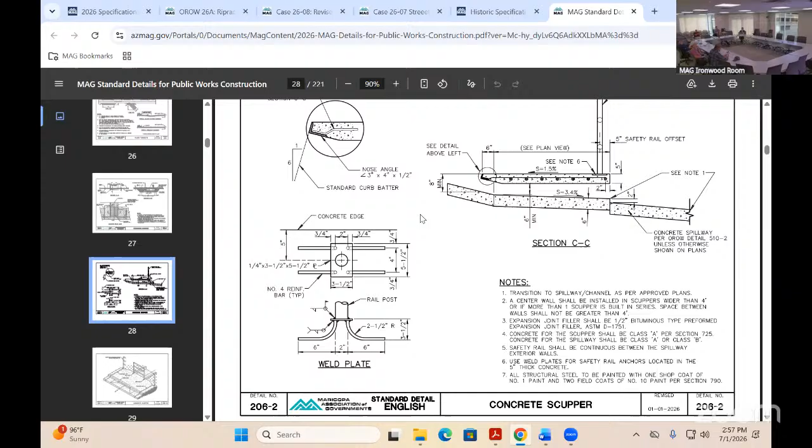When would you need protection? When wouldn't you? Because I think this case has its own merits. But I think I agree, we need to assemble everything, and that's what we kind of started to go down that path. I think that would make sense, and then see how to apply it, because it might affect other details as well. It's drop-offs, it's slopes. What would this overall encompassing one be requiring, and who's got stuff on it, and how would we approach that? Even head walls, I know we've talked about rails on head walls too. There's certain drop-offs there.

On a side comment, I've noticed on commercial projects, now that's outside the right of way, but on a lot of commercial developments, they like to use these steel plated scuppers a lot. And there's not necessarily a slope drop off, they just use it to convey water, say from off a roof or something, onto the sidewalk. And they never put handrail, or you rarely see handrail. But I see a lot of these design engineers referencing this mag spec to build the 203 type style scupper. And they rarely call out handrail, but it's interesting. At least you don't see the handrail. I don't know if they're supposed to be installing them or what, because it's on-site private, but just keep that in mind.

A lot of the private developers use this detail for on-site stuff. No, you're right, Jim, and I think on a lot of those applications the drop off is the same on the front side as it is on the back side. I don't know, there's again a clear distinction as to why you would just do it on one side, not the other. Yeah.

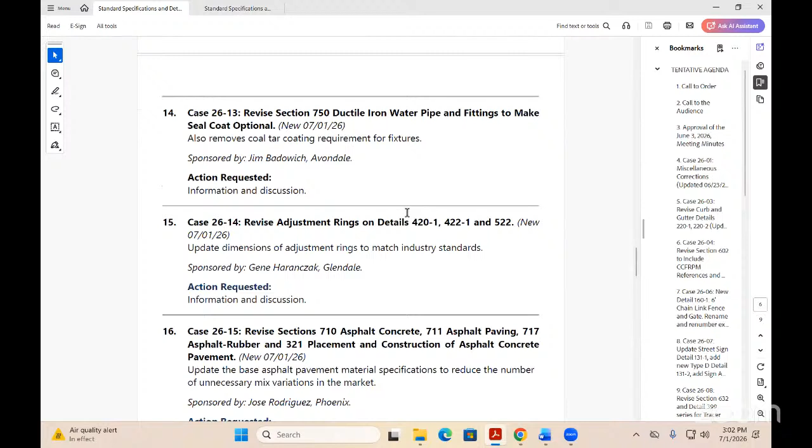Case 26-13, revision to section 750. Jim, I believe this is your case. Can you give us a brief introduction to it?

Yeah, I will. So you can see, unfortunately I didn't have time to do an introduction memo, but it's pretty straightforward. So again, in MAG we get these occasional, we gotta update our MAG spec to meet the current national standards that are out there. And when some of the industry reps brought this to our attention about the current AWWA C104, basically allows for an optional seal coat, or no seal coat for cement mortar lining on ductile iron pipe.

I guess that goes back to 1995, but back in the day when they were doing this, the seal coat, in order to cure it, they had to use this lining for it. But current process, to now today's standards, the application of the cement mortar lining, it's improved obviously with everything else, and industry says there's no longer a need to line and cure the pipe through the old methods. So what AWWA C104 did is make it optional, because it's really not necessary anymore with today's manufacturing technology.

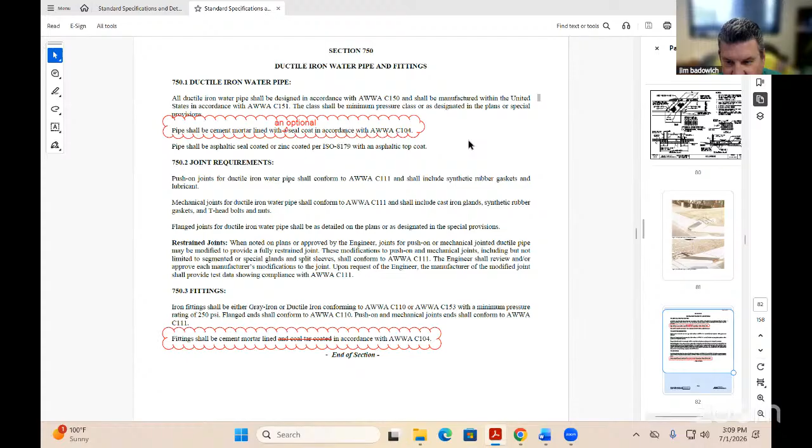Mr. Chair, I think Jim and I will look at that again in the working group. I'll bring in at least two pipe manufacturers to discuss it. When you use the word optional, somebody's got to make a decision on whether we need it or not, and I know it caused some confusion. So that's kind of what I thought after thinking about this some more: if it already references 104, then what's the problem?

And to Jim's defense, this is not his case. This was brought by a pipe manufacturer, an actual ductile iron pipe manufacturer, so we'll do a little digging on that in the next working group.

All right, that's all I had. Thank you for keeping us current. Does anybody else have a question for Jim on this case? If not, we'll move right along to the next one.

Case 26-14, revised adjustment rings on details 420, 422, and 522.

Gene, this is your case. Yeah, thank you, Mr. Chair.

So the reinforcement notes are outdated. How I stumbled across this is during submittal review, something caught my eye - it was the 3000 PSI compressive strength, and I thought it was odd because it's in a roadway like that. So I started doing a little digging, and what I found is that the notes are completely outdated, no longer comply with the current requirements listed in ASTM C478.

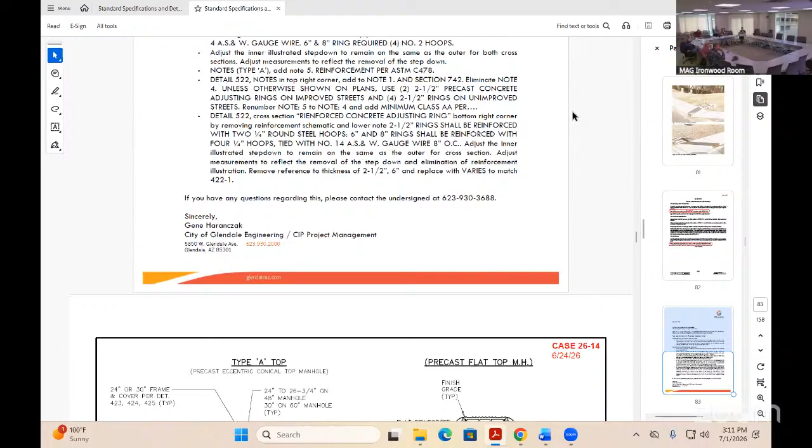Detail 422-1, also update that cross section for the adjustment ring detail in the top left corner there by removing the reinforcement schematic again, and the note for the number 2 hoops. There was all kinds of stuff in there - number 2 hoops, 4-inch ring tied with number 14 AS and W gauge wire, all kinds of stuff in there. So we'd remove all that.

The only reason why that's in red is because I wasn't sure if we should reference where that little leg came up and that little arrow came over to the side on the top left corner. That's where all the reference to the hoops, the ring tied, and the gauge wire was at, where really we need to be referencing C478. So either I can put it there or drop it into the notes as note 5, which I kind of prefer, but we can discuss that once I get through some of these changes I'm putting out for the group.

Also, I adjusted the illustration for the step down because it was showing that there was a step down in that frame or adjustment ring, so it wasn't perfectly level all the way across, which isn't consistent with what's being supplied.

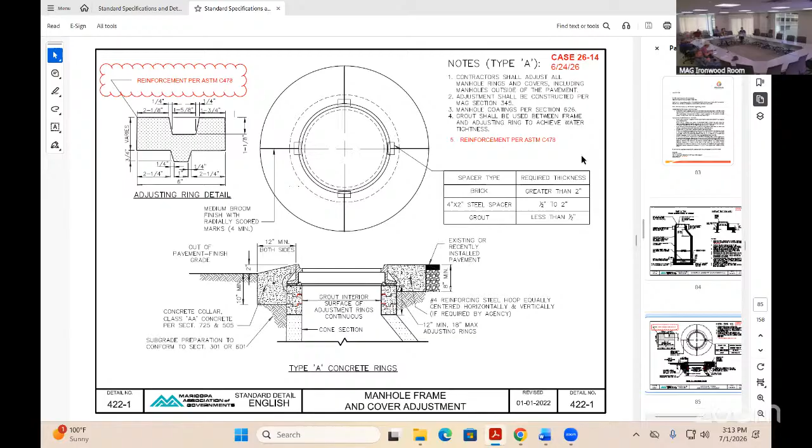What else? Notes type A on type A, add note reinforcement down there. Detail 422, note at the top right corner, we'll go ahead and suggest that we add to note 1 also section 742 in that language there for note 1.

Eliminate note 4 unless otherwise shown on plans. Use 2.5-inch precast adjusting rings on improved streets versus using 4 on improved street, then you use 4 in unimproved streets. I don't know what the difference is - that's not the practice being suggested to me by industry, which I would agree with them 100%. We should just keep it the same all the way across, whether it's in the street or out of the street. Agreed.

Otherwise, someone's gonna have to try to figure out what's the difference, right? Yeah, I thought for some reason you put more rings on an improved street, so that way when you ever come to lower it, you don't have to take out the cone. The problem is though, when you get into flat top scenarios, storm drain scenarios, we've all run into it - Litchfield and Northern Parkway, we ran into it. You're at grade with that flat top because it's so flat, you know? Yeah, there's no room for rings. There is no room for rings.

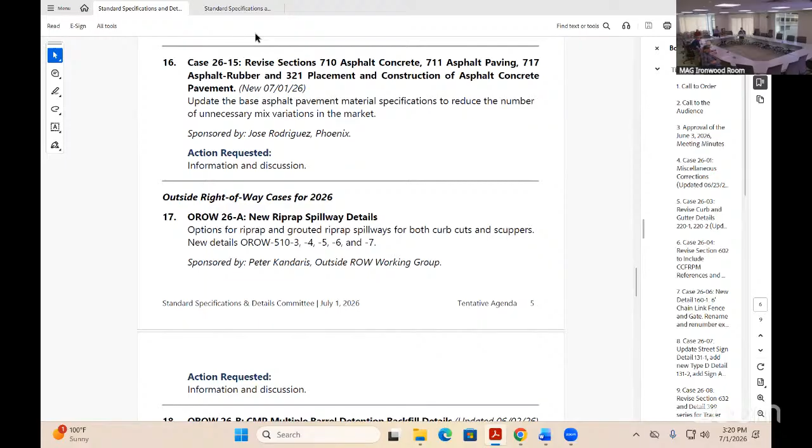Revisions to sections 710, 711, 717, and 321 in relation to asphalt concrete mix designs and paving. This is my case, so there's a brief introduction memo in the agenda packet, but this case arises from a recent session workshop hosted by the ASU Consortium, where we had Dr. Osan give a presentation a couple of months ago.

There was an industry meeting to discuss improving our mix designs for conventional non-polymer asphalt mixes, to try to get most municipalities to come to a unified mix design, and also to look into the mix design methodology and binder grade being used to address cracking issues on our roads, to come up with a more current and best mix design specification to use nowadays. So three different teams got put together to review binder selection, mix design specifications, and I believe the other was aggregate criteria.

These changes to the specifications are the result of the aggregate efforts, and I think Alex, because he participated in a couple of those working groups, and anybody else who participated. Some of the major highlights: under section 710, the Marshall mix design methodology is now being removed, and everything is being based on a gyratory mix design. The other major change is transitioning from our PG 70-10 grade to a PG 70-16 grade for conventional mixes, and a PG 64-22 when the mix design uses RAP.

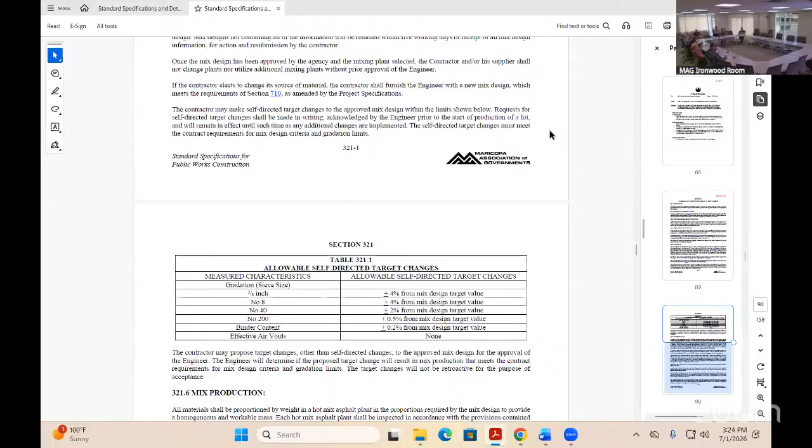I don't know, Alex, if you want to help me out in case I'm missing something of the big highlights. No, I think you hit the highlights very well. I think the goal was we understand polymer modified binders are the superior performing binders, but we also wanted to provide some better and best, or some good and better opportunities than what's currently out there. Additionally, going through this, I really appreciate the City of Phoenix and Parnean's help as well, tried to be very inclusive of a lot of what agencies already had in their addendums, including certain things with gradation, volumetric properties, those other design things, and tried to be extremely inclusive there to make this palatable to all agencies as well.

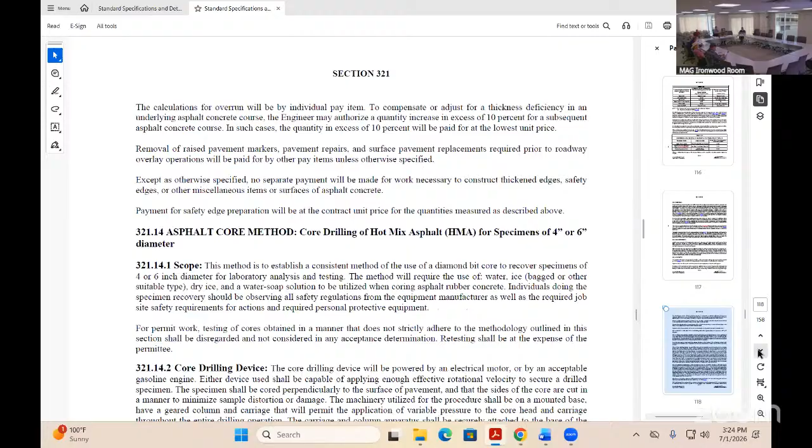Yes, thank you for that. And I believe something new on section 710 related to mix design is now the reference to a fine graded and a coarse gradation bands. I believe that's also the intent for being inclusive of other agencies and how they're using their mix design designations. Yeah, there's fine graded and coarse graded. The gyration levels were decreased from the original MAG 710, from 100 gyrations down to 75 for higher traffic applications and 50 gyrations for lower traffic applications, as well as, like we said, some of the other coarse and fine graded mixes.

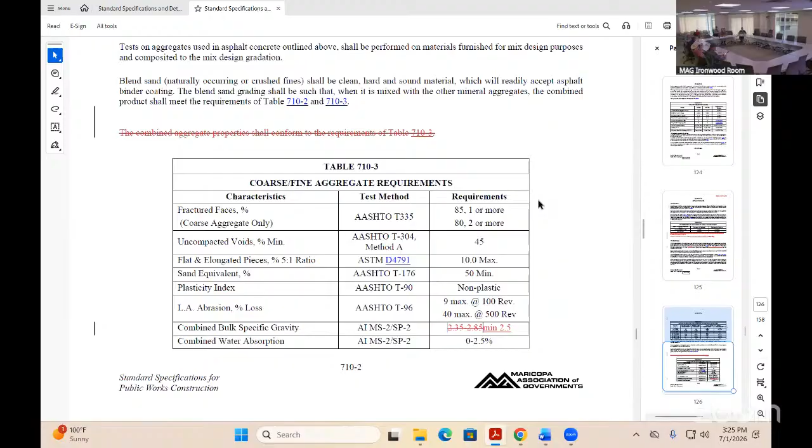So regardless of where you're placing that material, even if it's going to be used in a parking lot for instance, there are options available for various applications from the lowest to highest traffic levels. And for some of the more materials inclined members here, the mix design specifications do aim to ultimately achieve more effective binder. There's changes to the specifications within the document that you'll see that is the goal, and that's also the main driver for reducing the number of gyrations. So, correct.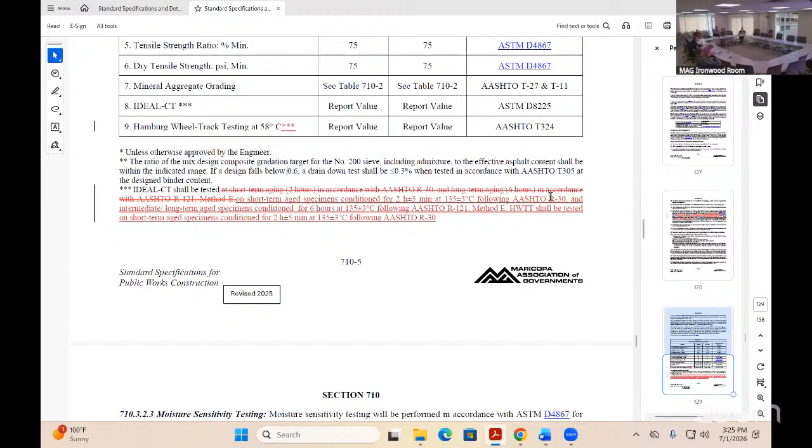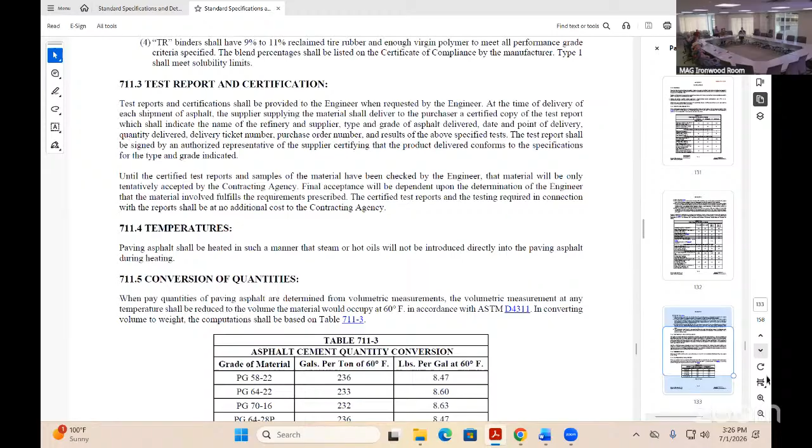I know there's a number of agencies and members that have reviewed this, but we definitely appreciate it. For those agencies that have staff that review or deal with material items, if they can also take the time to review this. Again, the underlying goal of this is to hopefully all achieve or come to a consensus of mix design that ultimately results in fewer mixes out there.

Yeah, industry's primary concern with this process is ensuring uniform adoption. If we're looking at adding grades, if it's not usable for everybody, then that becomes a major logistical challenge, adding additional grades of binder. A little bit more on that topic, Alex. I think most plants can handle 3 to 4 binder grades. Most plants have 1 to 3 tanks locally, and we're already juggling between ADOT and MAG, as well as other municipalities, up to 7 different grades of binder regularly.

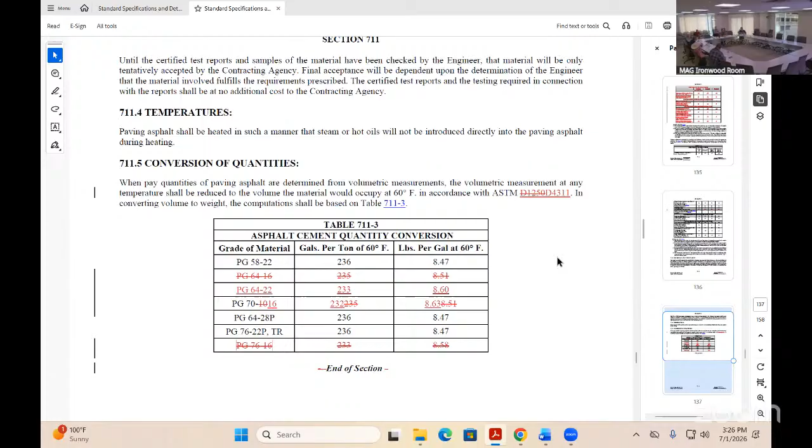So the more, and again, we're all in the same climate, so there's not that much temperature variation between Vistancia and East Gilbert. Yeah, I think, Mr. Chair, every municipality likes their own flavored brownie. That's right.

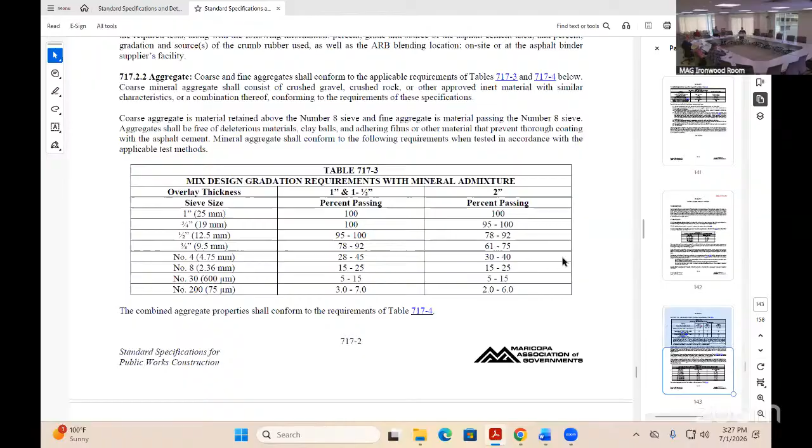I remember when Glendale went to SHRP mix. Yep, and everybody was like, but it doesn't look smooth, you know, it looks coarse. You put this down and now we don't like it. Well, that was the first barrage of all that.

Oh yeah, and to that point, when I first initially saw the removal of Marshall mixes, I thought to myself, all the residential neighborhoods, those kids are not going to want to ride their skateboards, it's going to be rough. Well, it's true, but that's not how it's paved, correct? No, while these are all compacted in a gyratory, that's why we included the fine graded option. Yeah, so it will look more like the traditional Marshall mix, but be that superpave mix. Just using the Marshall, it'll look better. Yeah, that's nice, temporary surface.

Mr. Chair, Alex, just wanted to say thank you. I'm glad to see this get to the finish line. I know this was a lot of work to put together, so thank you.

There is a lot of changes within it. I'll briefly cover the highlights, Warren. So if you have staff that can help review this, we will. Yeah, we definitely spoke up and supported this effort. There sounds like maybe a few modifications, but we'll definitely review it.

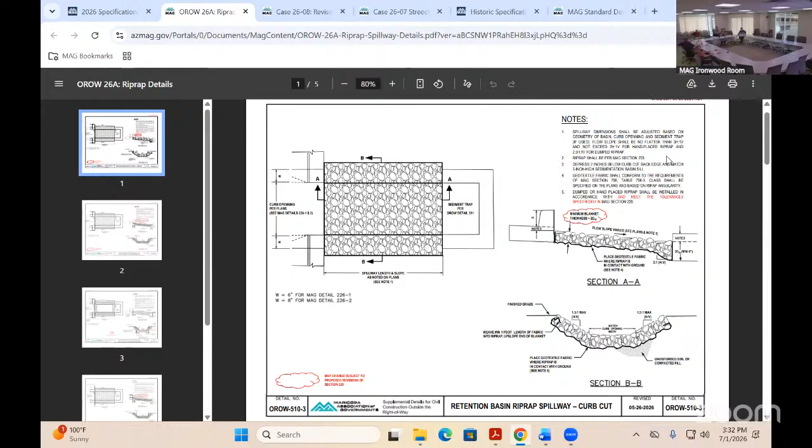So I didn't propose anything new here. What I will do is clean this version up, assuming it can now move forward by itself. I think that was the major discussion, that we don't need to really rely on 220 to go ahead and get riprap spillways in. It's a smaller piece, it's not going to be affected by the existing 220. It's fine with the spillways as they are.

So with that, I'm also going to ask for, and we talked about it with Brian, to go ahead and get volunteers for a sub-working group to be involved with this process. I think we had a couple volunteers. And Brian, you were going to look toward getting somebody in industry. Is Brian still on the call? Never sure. Yeah, Brian, you're still there.

You were going to look toward getting a representative from industry to educate us on 220. It's separate from this one, but this is just a good opportunity to go ahead and ask people who would want to be involved with the review of the 220 sections. It's not going to happen this year, but we do want to get a group together so we start talking through this year, so by first of next year we can work it out. In this case, we'll just move forward. I'll provide something for next month, but I don't want to leave this meeting without bringing that up. We do need volunteers for 220.

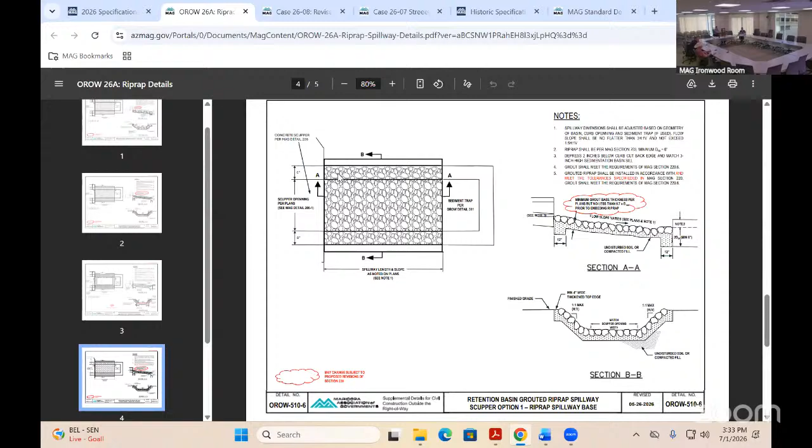So think about it - silence happens. Think about that and please get word to Gordon, probably the best way, on who'd like to be involved. Again, we have a couple - Wayne Colbank has already volunteered to be on it on the next side. But we do definitely need contractors and suppliers on this to establish reality for 220. Peter, you can count me in - this is George at Rummel. George, okay.

Yes, and just to add, if it's not the member agency that's here at the meeting, but if you know somebody in your organization or in industry that can provide valuable input, it's definitely worth reaching out potentially. Have one of my guys participate as well. Very good, yeah, just not from the supplier perspective.

Yeah, we do need that. So we're looking at realistic materials, realistic placement methods, and realistic testing of that. And we're going to have some kind of panel testing. What would be the scope and size of the project that would be applicable to? Also, really good education to make sure the section deals with it if there's more than one way that grouted riprap, and primarily it's the grouted riprap that's the issue.

There's more than one way grouted riprap is placed. We've seen where you place the grout, then push the riprap into it. Then there's the opposite side, where riprap is placed and grout is spread and then cleaned up. We need to find out, is that what happens at agencies in Maricopa County? And make sure that 220 reflects how the placement is actually being done. And if tolerances are needed, how would we approach that? So I want to take some time to get that worked out.

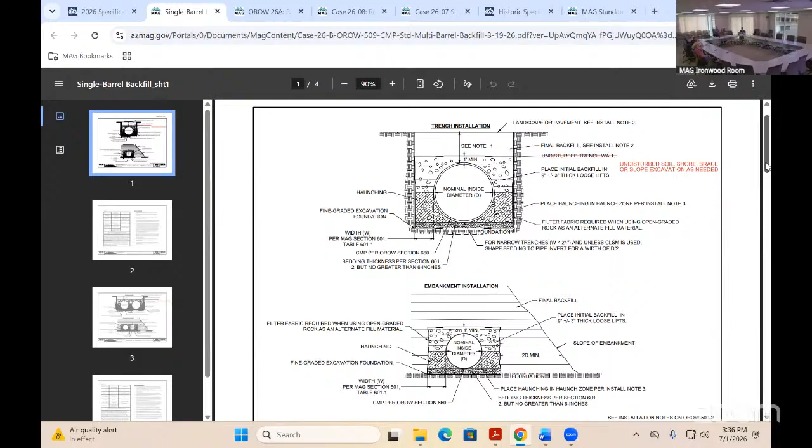Yeah, Brian brought this up during the meeting. It's the wording - it says undisturbed trench wall and shows a vertical side, and that's being interpreted as meaning it had to be a vertical side. So the idea was getting language that would identify that the shape of the wall is dependent on the conditions.

So I think Gordon had worked up some language. Yeah, Gordon sent a draft, and as I was reviewing it, I was trying to be as consistent as possible with our current details. I wasn't able to find it anywhere in our normal pipe backfill details where we specify that the excavation can be sloped back or multiple, but because this particular version already called out the trench wall, I tried to come up with an alternate version to address the concern, and this is the language I came up with.

Okay, again, I went back to the 601 spec and the language it uses in relation to trench safety. So that's kind of where I borrowed from.

Yeah, it was just to incorporate the fact that often it's not a vertical sidewall. Correct, and we did verify with the manufacturers during the meeting that a vertical sidewall is generally not required for design - it's a site condition. So anything that recognizes there's a site condition that has to be dealt with, that was the idea.

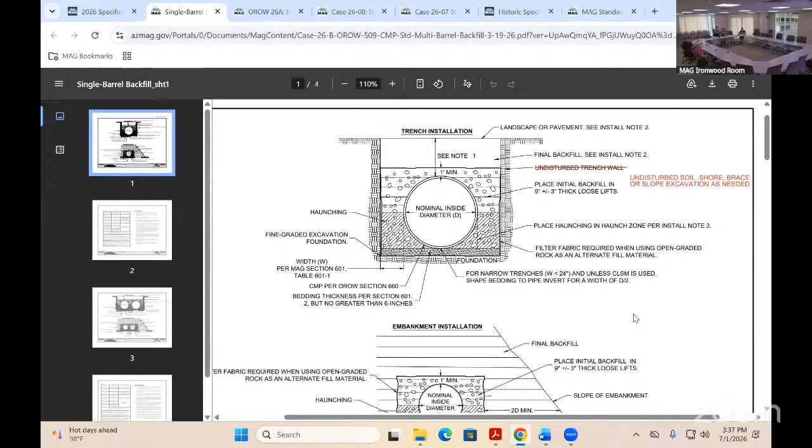I'm wondering if we should say undisturbed soil shall be shored, braced, or sloped as required. Undisturbed soil - to be, instead of shall, I don't want to put that. Undisturbed soil to be shored, braced, or sloped as needed.

The way it's written, there's a period there that you can't see, right? It calls out undisturbed soil, then shore, brace, or slope excavation as needed. You're saying that then, yes, my eyesight's bad enough. Okay, Brian, I think that's what you were trying to get to.

I think that meets the intent of what was being discussed. Yeah, I didn't want to go into too much detail because it's just a note, not details. It was just to make sure there was an understanding that it did not have to be a vertical sidewall.

Works for me. I'd say we're good to go with it. All right, does anybody else have any questions on this particular case?

You're talking about the vertical edges on the diagram itself. Yes, correct. Could you just slope one side of the diagram? We talked about doing that, and we were trying to get the case through right now.

This is more consistent with what's in the existing MAG, if I remember right. Yeah, vendors have pointed that out too. I think because some vendor details do show one side being sloped and one side being vertical.

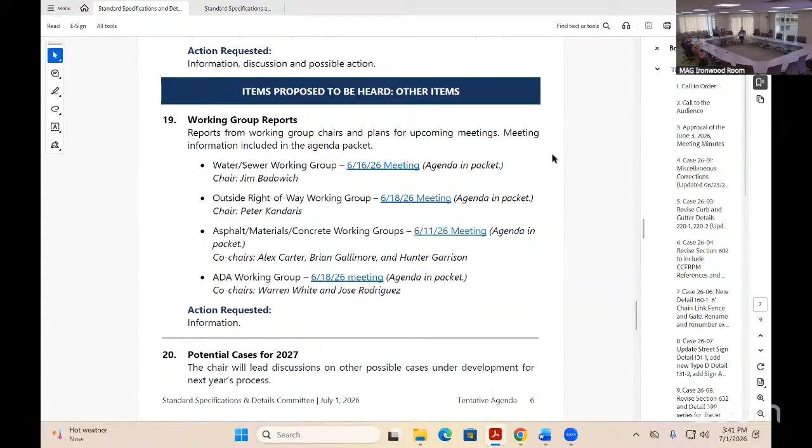I'll try to be mindful of the time. Jim, can you just give us a brief update on the Water and Sewer Working Group? Is Jim still around? Is Jim muted? Yeah, here, sorry Mr. Chairman, I got, looking for something here.

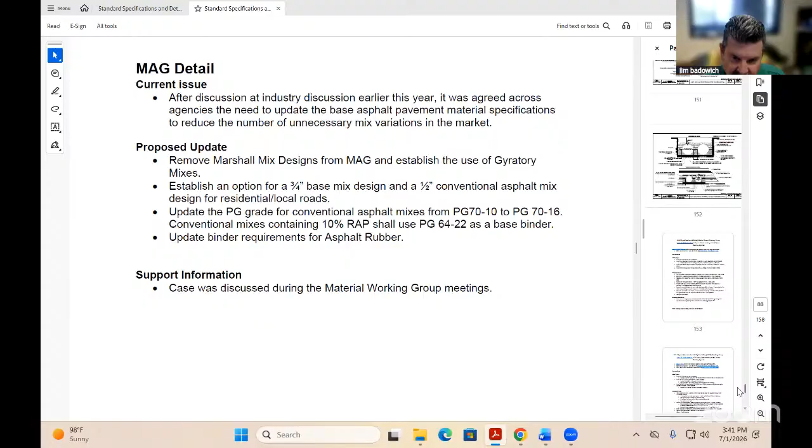So yes, our Water and Sewer Working Group met on June 16th. But I'm not gonna go into detail. We covered basically a lot of the cases that we talked about today.

We did have a little discussion on City of Phoenix updating their supplements, and Rob Duval from City of Phoenix suggested that Phoenix doesn't allow water consolidation. And I know MAG 601.4.7 still allows water consolidation, mainly by jetting.

And we had a little discussion on that. I'd like people to think about that and see how it is at their agencies, if you guys are still actively using that. From our discussion, I don't know if we're ready to take it out of MAG completely, but it does seem like it's not used much anymore. So maybe talk about that internally, if that's something down the road we want to look at taking out.

What else? Had a little discussion on sewer, when you review sewer videos. We've noticed in Avondale, sometimes when we're looking at these videos, the joints sometimes look questionable, and sometimes there's too much of a gap that we question. So we got looking into the industry standard on that, and how much is too much of a gap?

And the question is: is the pipe being inserted far enough, or is it too far? And everybody, it seems like the majority of the stuff is it's butting right up against the inside of the bell, and apparently, according to industry standard, that might be too far.

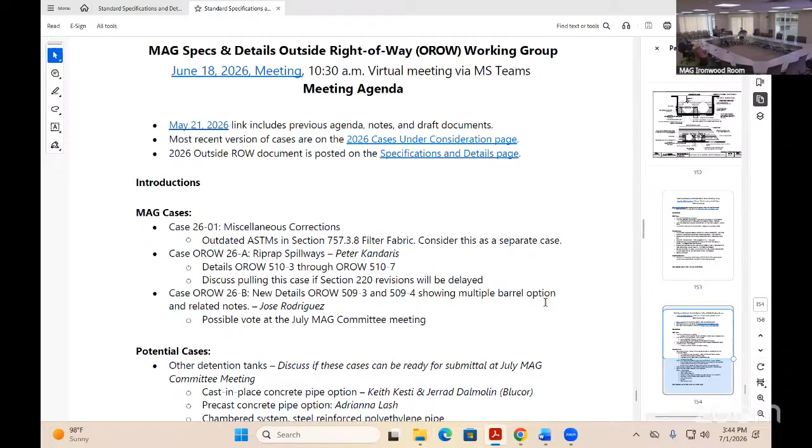Yes, we already talked about the two cases. We had the meeting on the 18th. It's important that we get case 26B done so we can use that as the template, because we've got the precast lined up and we're looking at the future chambered ones. So we're trying to get the same format ready to go. As soon as that's done, I think the vendors will start working on those. Our goal is next year to have at least 2, if not 3, new detention tank options.

We talked about the riprap. We were forming a sub-working group for that, so we've covered that already. We're not going to delay 26A, we're just going to keep moving forward with that.

We talked about the safety rail on side slopes already, hoping we could get something working with other groups. The geosynthetics section is going to be revised next year, and I now feel like we're lagging behind on agency supplement reductions because everybody else is working on them now, so we need to look at those also.

Our next meeting, everybody was gracious enough to push it to July 30th because I'm traveling on both of the next two Thursdays that we normally have the meeting. So that's what's going on. All right, thank you, Peter.

Materials working group, Alex? The majority of our conversation was regarding the amendments to 710. We briefly went over some of the City of Phoenix supplements potentially included in the MAG. Rob presented on those - really 710 is the primary push that we have there. I did note that we were considering if that was even a possibility to get completed this season.

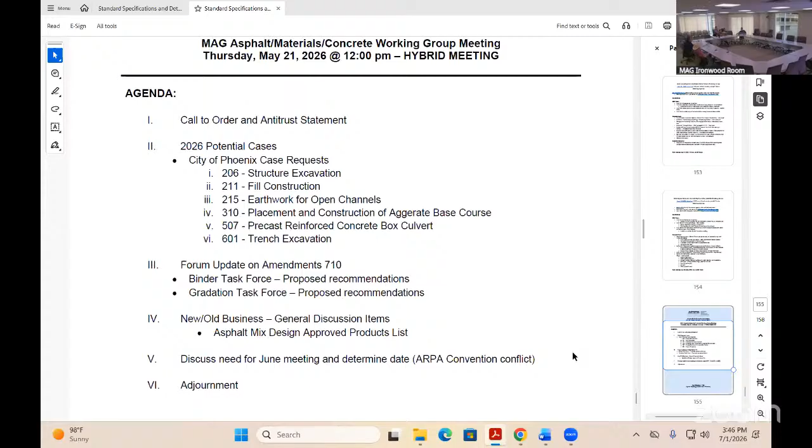Nope, that was it. Great work with all that. Yeah, it's been a good year with all that stuff for asphalt. Great year, thank you guys. All right, thank you for your time, Chairman. Thanks, Alex, and thanks, Hunter.

ADA working group, Warren? Yeah, thanks Mr. Chair, just a couple highlights for the sake of time. I did share that there is the 2026 National ADA Symposium happening in North Scottsdale, July 19th through the 22nd. Looks like a few breakout sessions regarding PROWAG, so we might hear some more details in terms of status and adoptions. Hope to hear more maybe later in July.

Other than that, a lot of these items are still work in progress. We talked a lot about the sign detail and the scupper detail, but the other items we're still working through and need some more discussion on. So the next meeting is July 16th at 2:30. Thanks.

All right, thanks Warren. Moving down the agenda, potential cases for 2027. If you didn't hear earlier, today was the last day to introduce any new case - anything else coming up as a new case will have to go into 2027. I think the list is in front of us; this is some of the stuff being worked on in the working groups. If anybody wants further discussion, it's encouraged to start at the working group level and then bring it up to the main MAG committee.